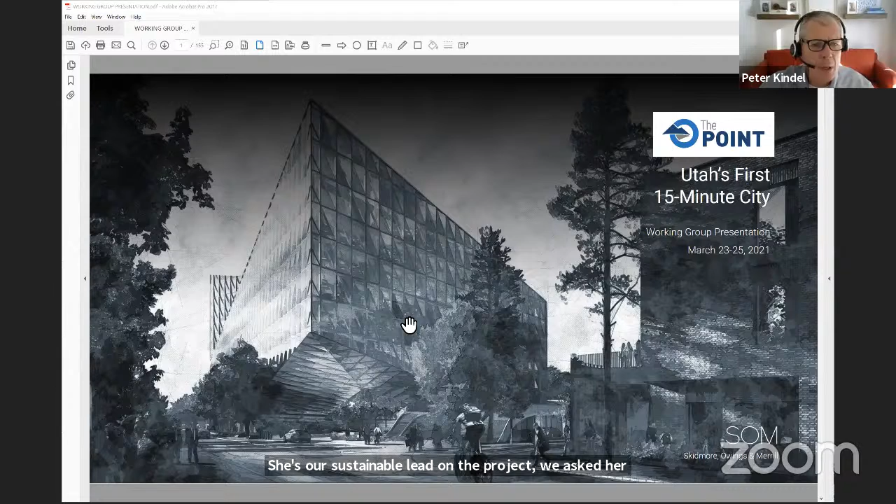Great, thank you Alan, and great to see everybody again. I also want to introduce Arthi Gowda, our sustainability lead on the project. We asked her to join today because of the subject matter. As Alan mentioned, I'll walk through a quick summary of the three schemes or three concepts.

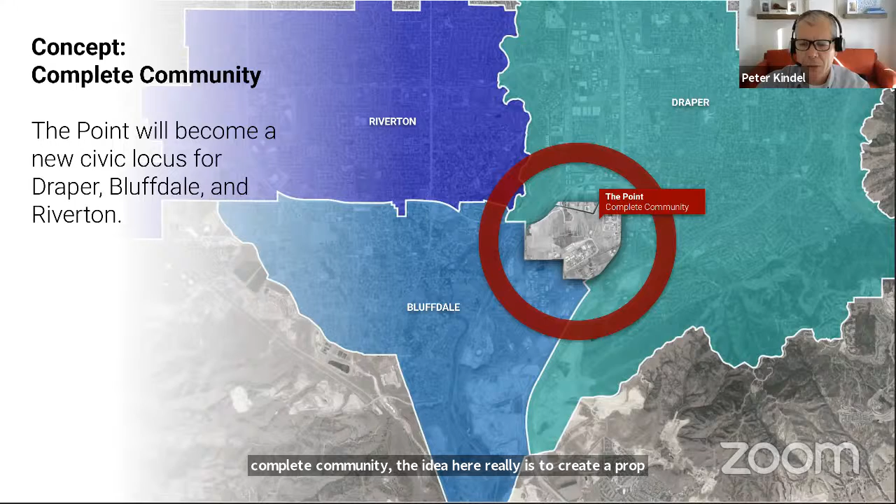Concept one is the complete community. The idea is to create a project most responsive to its immediate context, providing different land uses that complement what's around the site, and ensuring those land uses are mutually supportive. That's why we have a slightly higher proportion of residential uses in this concept, since that yields a better jobs-housing balance and reduces offsite trips.

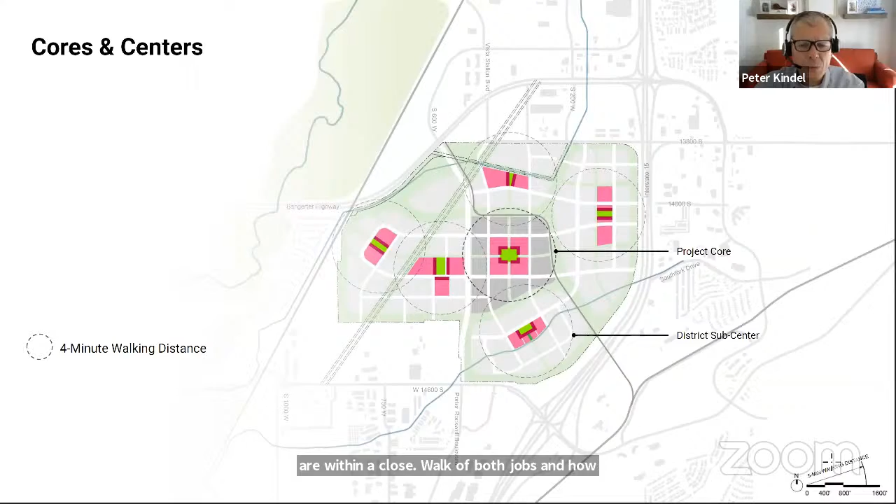We've designated land uses in each parcel. We also have cores and centers, the retail hubs of each concept, meant to provide daily services within a close walk of both jobs and housing. These might look like 2-story, perhaps 3-story buildings in some instances — a multi-use, mixed-use core and hub providing restaurants and retail services to employees and residents.

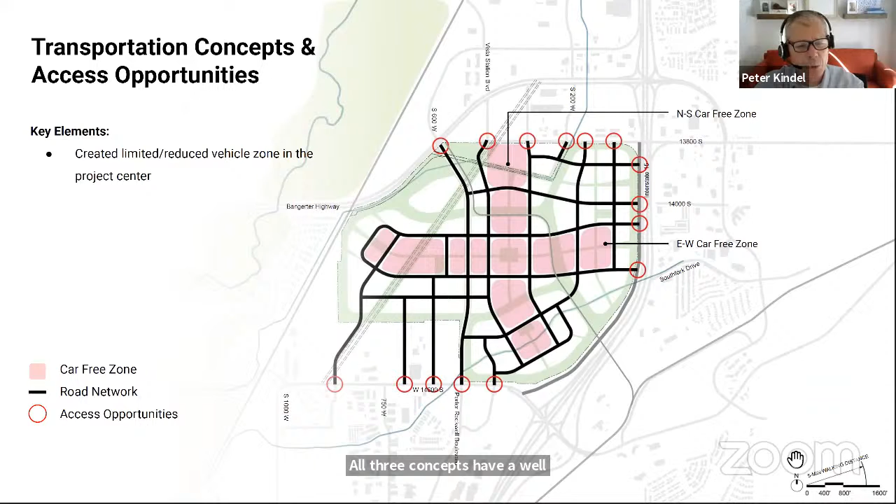Due to the population mix, which we anticipate being about 10,000 to 15,000 people on the site, we do have plans for a school. The location is still being discussed.

This is an illustration of the vertical development of the project. Generally these are 3- and 4-story buildings, but we're hoping at these central core areas there would be higher buildings and a little more density to provide focus to each neighborhood.

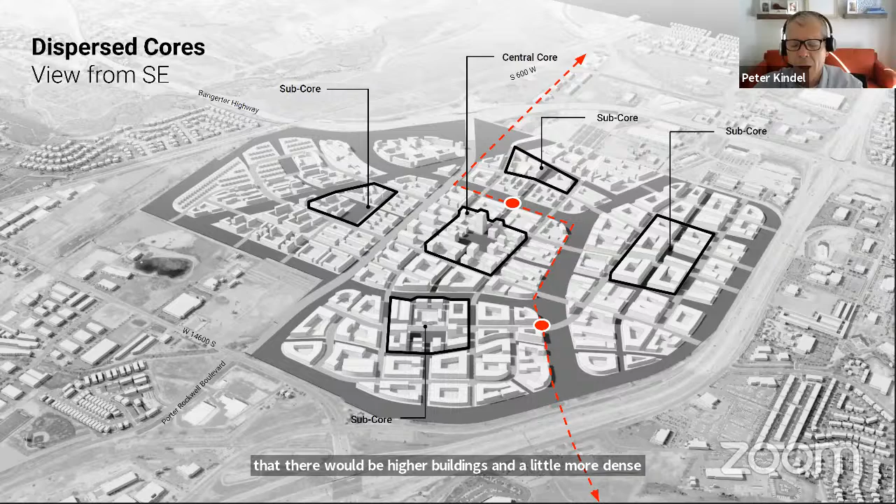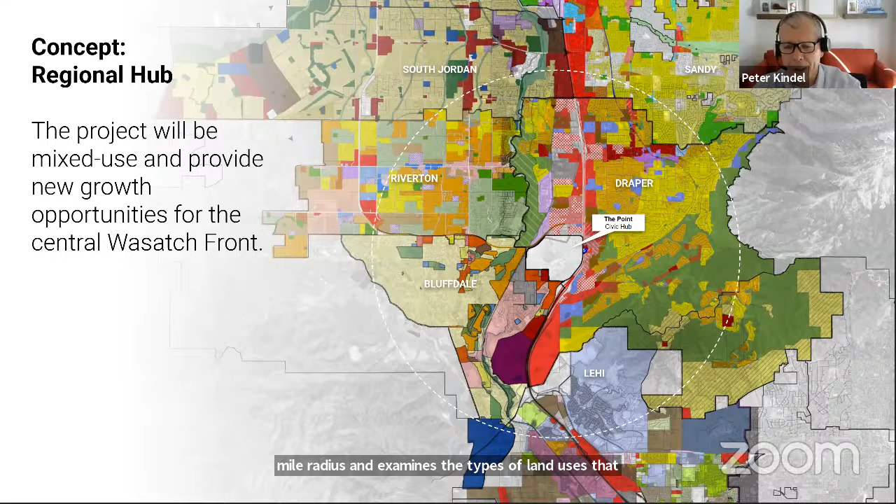The second concept is what we call the regional hub. This takes a wider look at the surrounding communities, about a 4 to 5 mile radius, and examines the types of land uses that might be appropriate within that catchment area.

We generally know the housing in that catchment area is mostly single family, so one idea is to provide additional multifamily housing. The other two important ideas for the regional hub are a retail and entertainment attraction to support surrounding communities, and a more significant open space element, a sports park. The sports park would be in the northwest, and the entertainment and retail piece, as you'll see in a minute, would be more in the center.

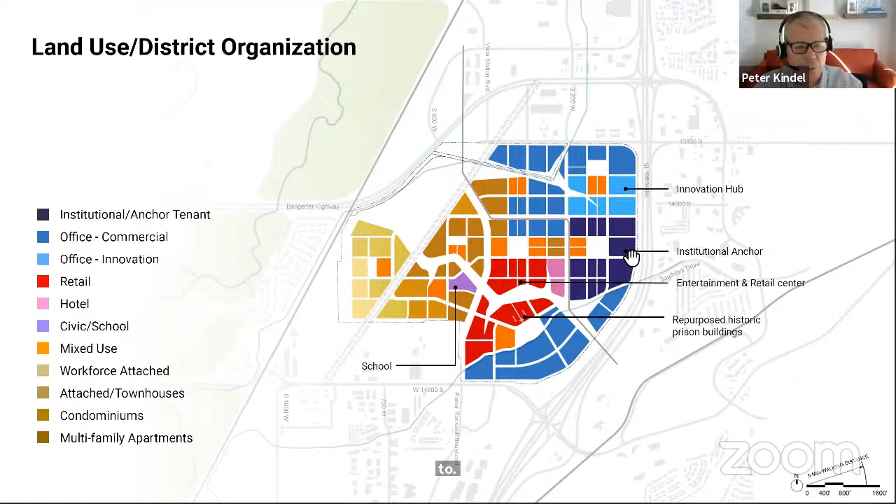We've also introduced an institutional anchor in concept 2, shown in dark blue on the right-hand side. The cores and centers would be a little more extensive, with more red and pink indicating the main project core, which might include gathering places off that park. So it's a mix of more urban public spaces and a linear park system.

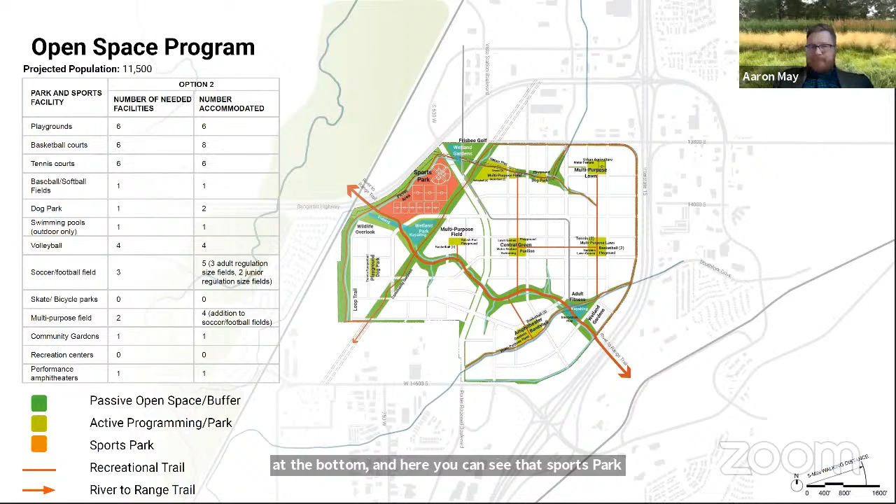We also hope that main linear park can manage and help control stormwater, acting almost as a tributary to the Jordan River, ending in a wetland park down at the bottom. Here you can see the sports park with sports fields shown. These would not be tournament-level fields; they'd probably be striped and demarcated but not lighted with extensive infrastructure around them.

The remainder of the open spaces would be programmed spaces with a slightly more focused landscape approach.

The linear park connecting through the middle of the site might look something like this, generally oriented towards bicyclists. We're hoping there could even be some grade separation between certain roads and bike trails, as you can see on the right-hand side.

Complementing that more naturalized regional open space idea would be more urban parks—smaller scale open spaces that complement the larger green space. The opportunities for car-free areas exist in the core areas of the project, which we're very excited about, complementing those larger green spaces.

This concept takes a slightly different approach to the micro-mobility strategy, introducing what we're calling an active mobility corridor—a bike and pedestrian loop linking together the whole project. Maybe it would have a light electric vehicle as a shuttle on there; we're still working through what that could be.

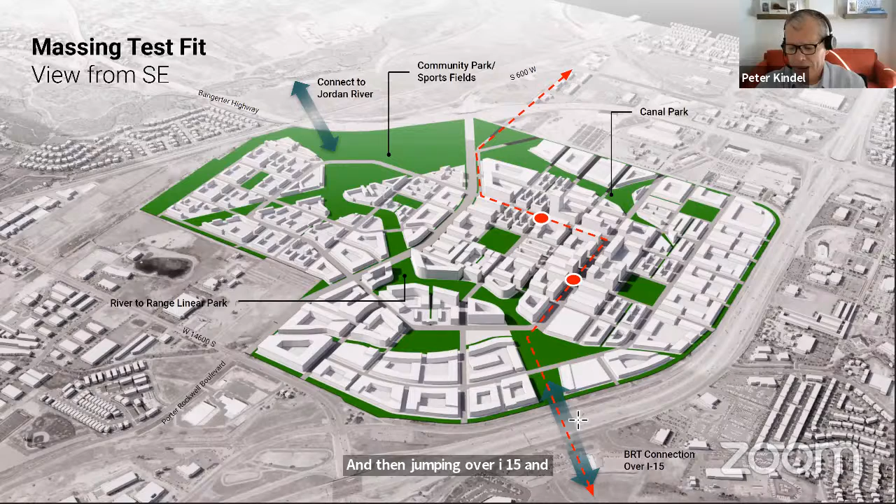Concept 3 is what we call the economic catalyst. As I mentioned, this is the most ambitious from a programming and development standpoint. We see this really as a third hub between Provo and Salt Lake, having a strong institutional or academic alliance, with the formative concept maximizing development potential.

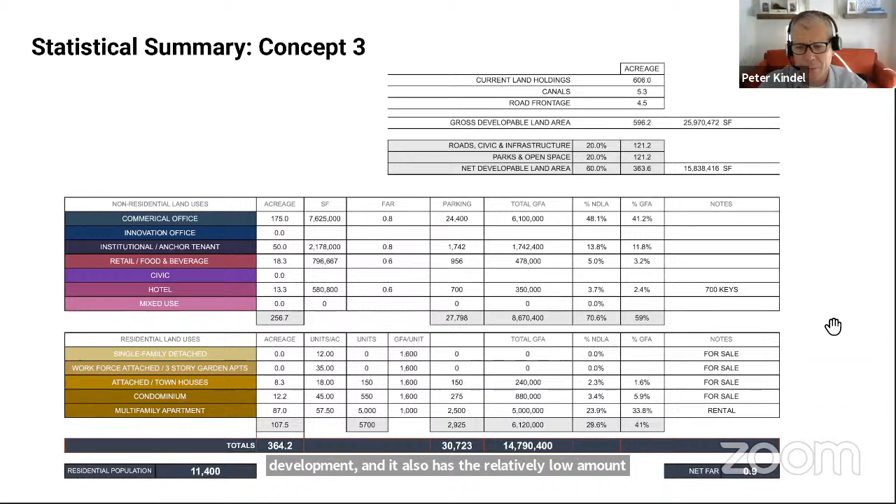Because of that, it has a higher proportion—256 acres of commercial development—and a relatively low amount of residential, about 40%. Because it's more growth oriented, it has the smallest percentage of open space, about 20%, with about 60% developable area.

It also has the most commercial and office uses, organized around a central core and a significant central park, which you can see here in the center of the drawing. It has an institutional anchor, and to the northeast, what we're calling an innovation accelerator—a second innovation-based hub more focused on R&D and product development.

The institutional buildings might look something like this—this is from Mission Bay in California, which has a significant institutional presence.

But this gives you an indication of the height and scale of probably some of the buildings in these institutional areas, and also the office elements.

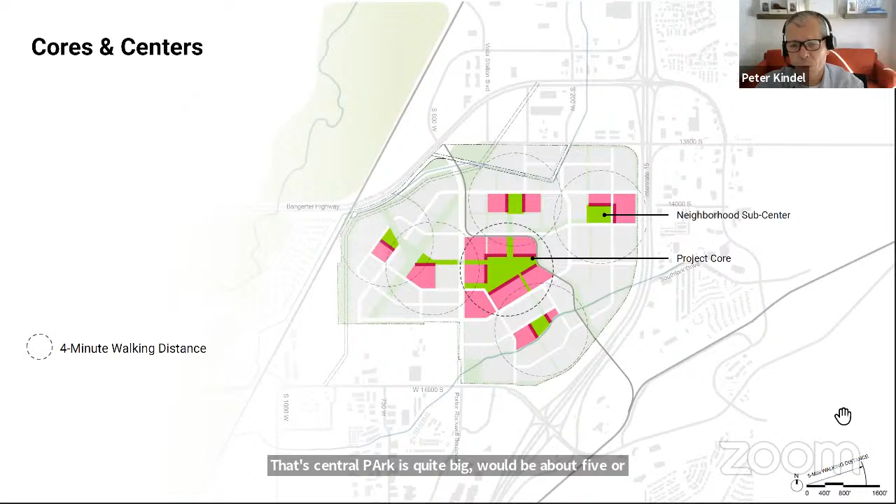The core and center in this concept really is quite distinct. You can see it there in the middle around that green Central Park. That Central Park is quite big—it would be about 5 or 6 acres in size, about 700 or 800 feet in the long dimension.

And then we see complementing that Central Park what we're calling the Hive. That would be a mixed use building that is taller—probably the tallest building in the project. It would also have multiple functions: school, incubator, social hub, lecture hall, really acting as a focal point for this economic catalyst idea.

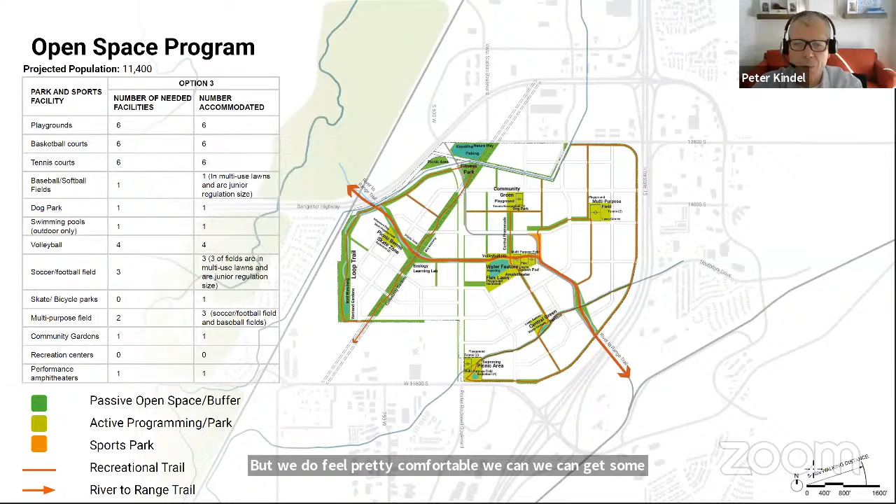Because this one has the smallest amount of open space, it does require a little more thinking in terms of how the open space is programmed. Here you can see some first thoughts on how that might be accomplished. But we do feel pretty comfortable we can get some usable recreational amenities in most of these parks—it'll just be a little more limited than some of the other concepts.

The Central Park may also have other community functions and activities lined by restaurants, as you can see here, and retail, but also just simply providing this respite from the development and also a gathering place.

Because concept 3 has the lowest amount of open space, we're a little more challenged in terms of how we can manage stormwater. So we're looking for a significant green infrastructure element to help us manage that water that falls on the site, also the snowfall, and really conserve the water.

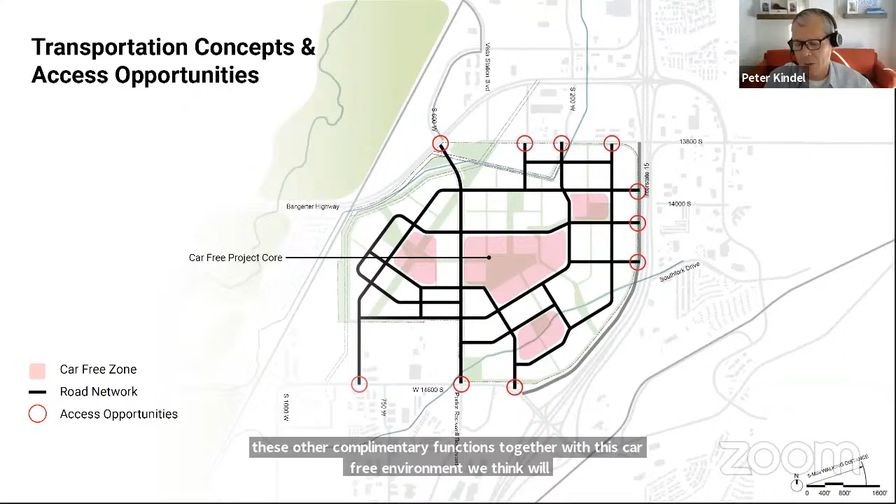The other interesting attribute of concept 3 is this quite significant car-free area in the center of the project. So the Central Park plus the Hive building and these other complementary functions, together with this car-free environment, we think will be a real signature of the project in this concept, and we're excited about that.

And that may include places like this, informal dining, outdoor dining in the summer. Really, I think an exciting environment.

This also does have the most significant institutional zone. In this case, it's predominantly oriented to the south, and the school, the K through 12 or K through 8 school, would be shown here in purple somewhere on the west side of that central boulevard.

And the institutional elements, again, may look something like this if it has more of an educational focus. This is from our project in Merced, California, the University of California, Merced, where there's libraries and research buildings and other institutional amenities.

So here you can see the three-dimensional test fit, we call it, of concept 3. You can see those taller buildings, slightly more dense development around that central park. You again see the scale of that central park—it's pretty significant. The BRT would run right through that central zone and then exit the site to the north.

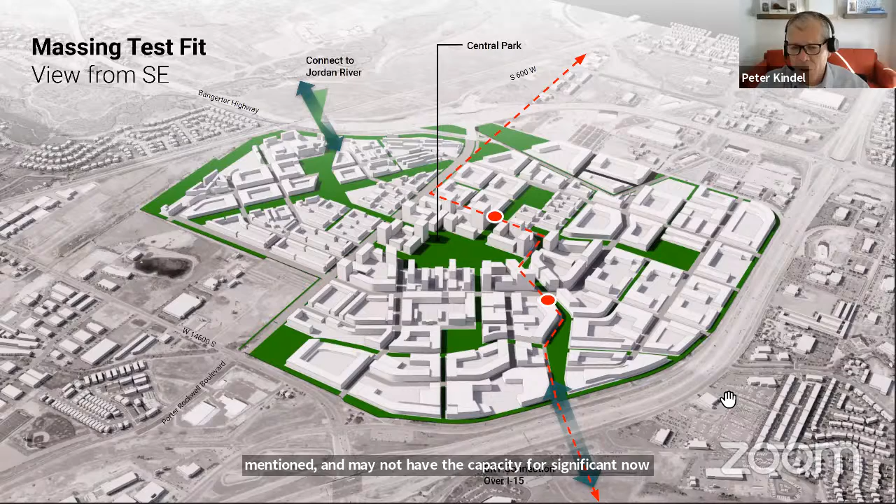And the Jordan River connection would still be there, but it's a little more constrained, as I mentioned, and may not have the capacity for significant naturalized areas or stormwater management, but it still would be there as a recreational connection. So those are the three options, and I'd be happy to take any questions you might have.

So this was kind of a review of where we were last time to make sure that we're up to speed. So before we go into showing how we've evaluated these concepts, any general questions or comments?

Ellen: I have one, and sorry I wasn't at the last session, but I'm curious why the commercial and residential are so segregated rather than having buildings that integrate them, like ground floor commercial, upper story residential.

Pete and Steve, you want to respond to that? Yeah, it's a discussion we've been having. For the next round, we will have mixed use development like that. Just for this round, we've only begun to indicate that in the drawings, but it's definitely something we want, and something we've recommended be a part of these core areas.

So even though you're just seeing red in certain areas on these plans, there actually would be additional retail in some of the neighborhoods. But I would add that where you see red, you should in your mind's eye see it as a large percentage of mixed use in those areas. So that red, think of it as what's going on the ground floor, not necessarily what's going on all the floors. It's just, it got really complicated to try and break down mixed use at this level.

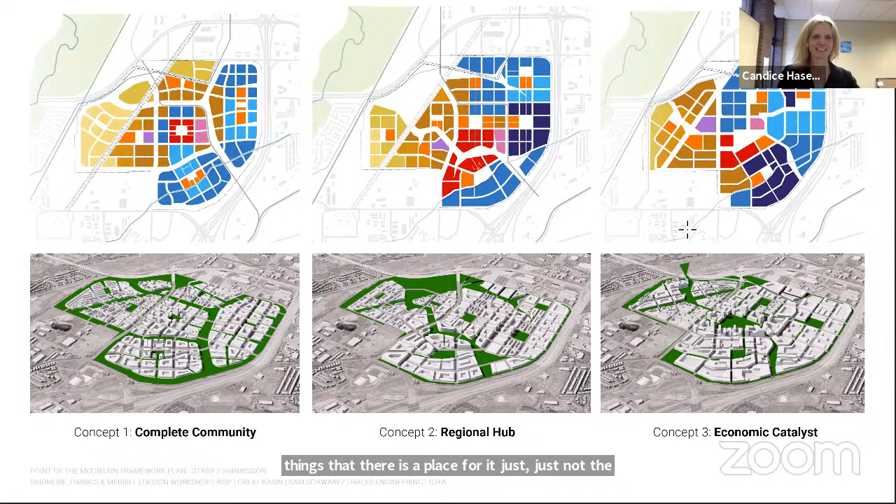I think we're on the same page there, Candice. Yeah, totally on the same page.

Yep, good, Soren. Thank you, Alan, and really appreciate a great presentation overview. I sat in on the one a couple weeks ago with the entire stakeholder group, so these look very familiar.

I had a couple of thoughts. One is building on what Candice just said, really thinking about the images and the nature of water use in an area where water is both decreasing in availability because of climate change impacts and increasing in demand because of the growth of the region. So be very conscientious about images used to portray ideas, that they really reflect the situation we're in.

I love the ideas around green infrastructure you've got worked in, particularly as we think about runoff and how those can be elements of natural landscapes as well. Would love to see some of the imagery reflect what that green infrastructure might look like as edges of maybe turfed areas and things like that, as you start to develop very project-specific imagery.

The other comments I have have to do with placement. In terms of school, we're working pretty actively with the Jordan River Commission and developing citizen science programs with elementary and secondary schools. I presume the school you're looking at here would be an elementary level institution.

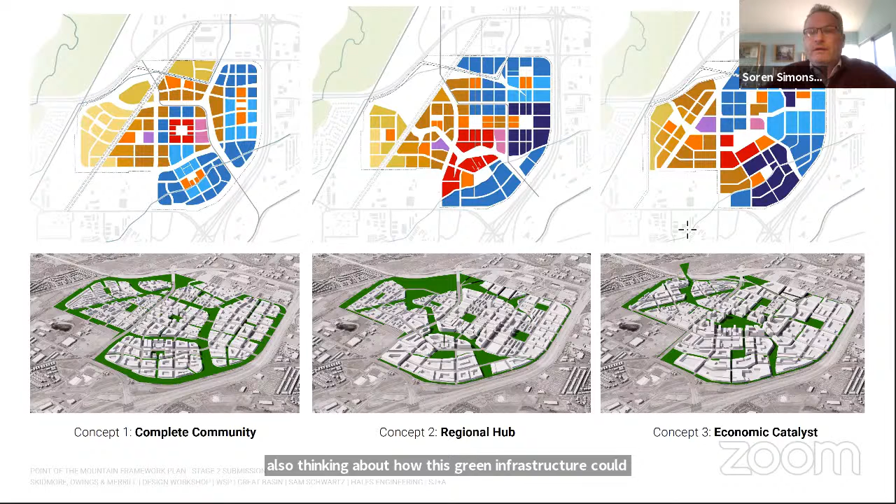Think really carefully about the placement of that school and the connectivity. I know in all of these schemes you have connections to the Galena Preserve and the Jordan River Parkway. We're hoping to really see schools located near the river take advantage of opportunities for hands-on science curriculum, which was recently adopted as an important core science standard in the state. These are important opportunities for students to be involved in bird monitoring, wildlife monitoring and habitat, understanding hydrology and how water systems work, and what better place to do it than right here where the range-to-river connections are so close. Also think about how this green infrastructure could be part of education opportunities, demonstrating things people could eventually implement in their own households.

Kind of along the lines of what Candice said, I don't know if you have this in your resource library, but look at the localscapes documentation prepared by Jordan Valley Water Conservancy District. I think that could apply to very small landscapes around buildings and buffers, but also to very large landscapes like active parks and play areas. In other words, focusing turf where it's needed, but really looking at other more natural, native and water-conserving landscapes around.

Sorry, Soren, what was the name of that organization?

It's Jordan Valley Water Conservancy District, and the document and program they've developed is called Localscapes. Really fantastic program that kind of gets at this.

A couple of other thoughts that have to do more with air quality. I see in at least the complete community the idea of buffering the freeway and Bangerter Highway, I-15 and Bangerter Highway. I don't know how familiar you are with a lot of the airshed research that's been going on over the last almost 3 decades now, that really was initiated in Utah and is happening all over the country. MIT and USC have been particularly focused on this. But the real health impacts of major freeway and rail corridors in terms of heart disease, lung disease, cancer, and things like that—buffering from these heavy transportation corridors becomes essential to well-being when people are spending large numbers of hours a day or at night in close proximity to these corridors that produce a lot of fine particulate matter.

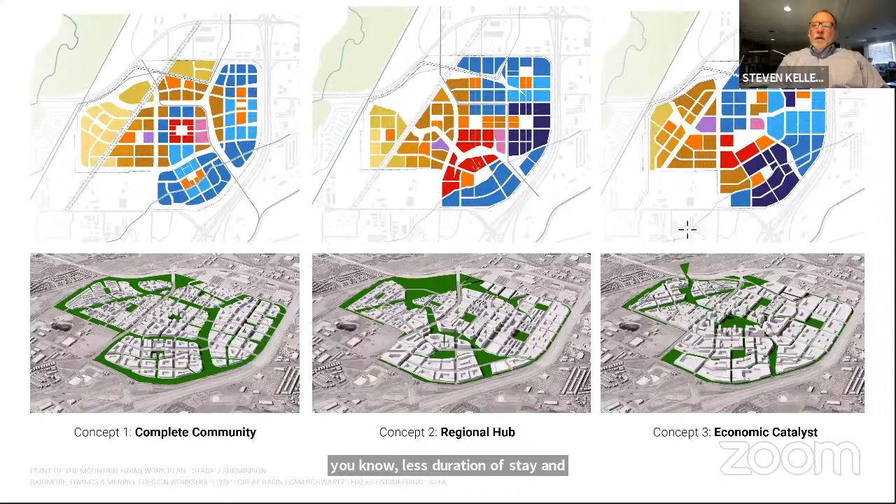The plans so far basically orient mostly non-residential and commercial uses adjacent to the interstate. Do you think it's the same issue, given the ability for less duration of stay, and also the ability for commercial buildings to process air quality mechanically? Sure, those are all factors, and it certainly could be an influence in the design of mechanical systems.

I think generally I might suggest connecting with Arden Pope at Brigham Young University. He was really doing a lot of the foundational work around this research that's now happening all over the country, and has been for a couple of decades, in terms of buffering from polluting corridors like a freeway or a heavy rail corridor. I'd definitely put him on your list of people to connect with to look at the latest research.

I don't consider myself an expert on it, but having worked around land use and public policy for 3 decades in Utah, and understanding air quality at any level is a health impact—but particularly in areas where it's such a heightened impact—I think it's worth investigating, because it does affect people's lives and livelihood, especially young people and aging individuals that are more affected by fine particulate matter. It certainly can have an economic impact in terms of land, but I think we're in a state and region that values life at least as equal to land value, and so I think that really should be a factor and a focus of this project as a demonstration of best practices.

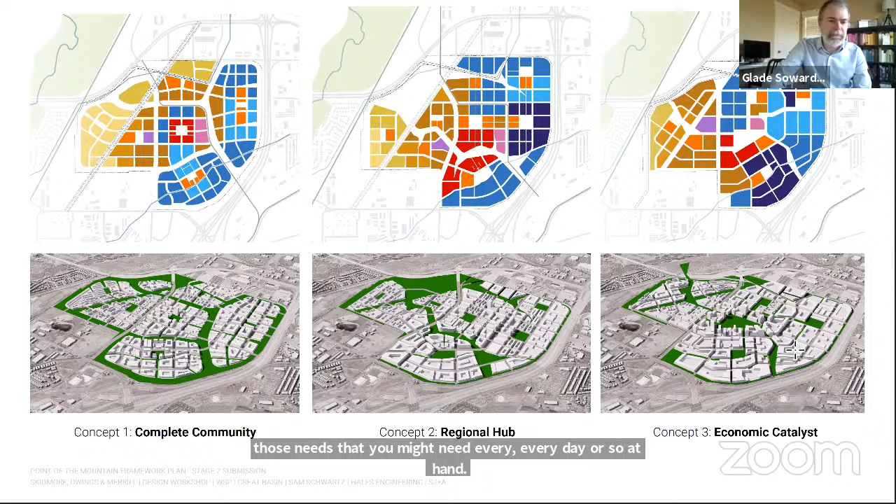Really good points, Glade, thank you. That is something we've given a lot of consideration to, and in fact you'll see some of that being evaluated in this next section. So thanks, very good points.

That's a terrific overview. At this point, we're going to dive deeper into each of these concepts and show how they perform relative to various key criteria we've identified, and then look forward to more discussion on some of those details. So Pete, turn it back to you. Great, thanks Alan.

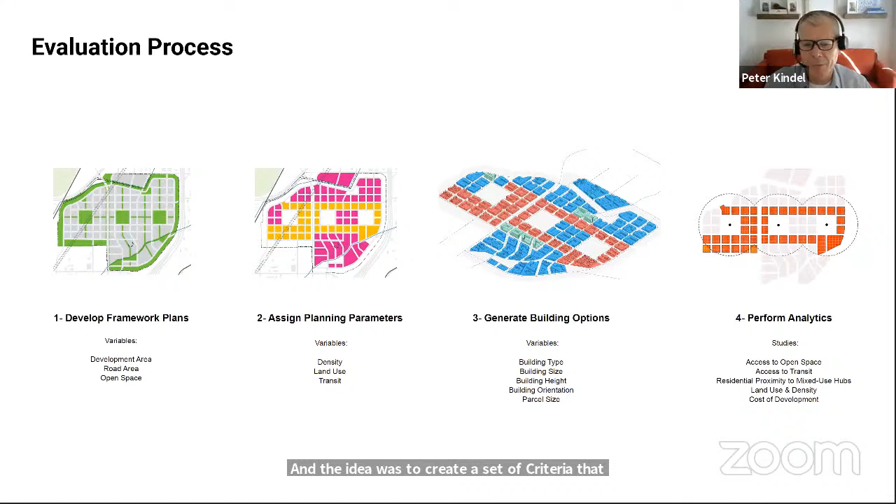As part of our stage 2 conclusions, we undertook an evaluation of the 3 options. The idea was to create a set of criteria that allowed us to objectively analyze the benefits of each concept. The basic methodology was to develop the framework plans, assign a series of planning parameters to them, and then perform analytics to varying degrees on those parameters. Again, the goal was to create an objective set of criteria to see which concept was performing better against these 25 criteria.

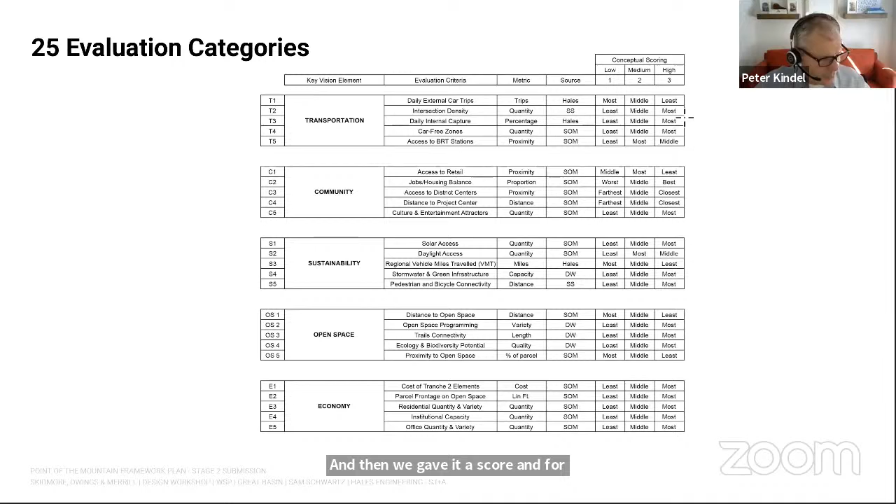Here you see the 25 criteria we developed. They're grouped into 5 categories on the left that correlate approximately with some key vision elements. We determined the specific criteria in this middle column, then identified a metric by which we would measure that criteria, and then gave it a score. For this round of work, we kept the scoring conceptually simple: we scored the best performing concept with a 3, the worst performing concept with a 1, and the middle one got a 2.

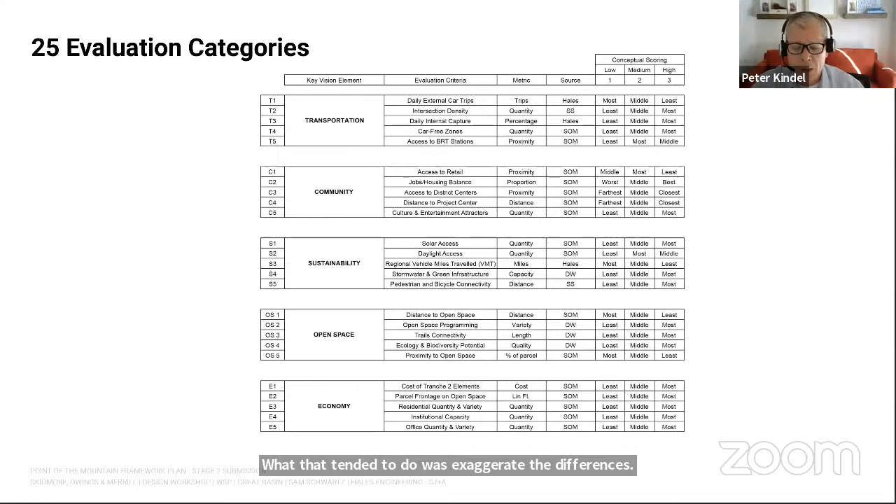What that tended to do was exaggerate the differences between the schemes, as you'll see as I go through them. However, through that exaggeration, it did give us a clearer picture of which scheme was performing better. So I'll go through these pretty quick—please feel free to stop me at any time.

Criteria 1 was daily external car trips. This is critically important in terms of air quality, and is dependent on the land use mix. You can see concept 1 performed much better than the other 2 concepts because of that land use mix—having residential here creates fewer external car trips. That's the simple reason why this one did so much better, by about 20,000 trips per day.

The second criteria is intersection density. Planners typically look at something like this because it's a measure of porosity of the plan, meaning how easily it is to move through the plan, both with a car and without a car, simply a measure of movement. In this concept, the intersection density was highest on concept 2.

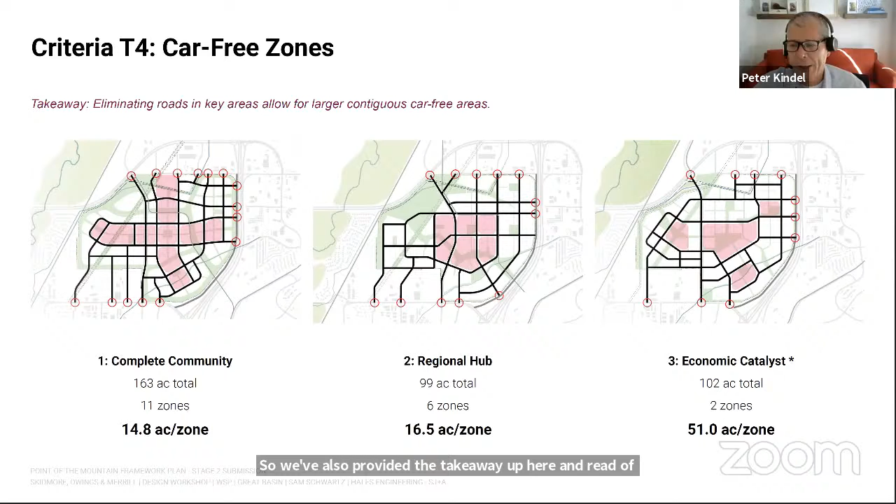These are preliminary recommendations, open to comment. Our conclusions: residential land use must remain a portion of the project program. Number 2, create the smallest reasonable block to facilitate connectivity. Number 3, adopt a regional retail mix that increases on-site capture. Number 4, access to BRT - minimize large open spaces near BRT. This sounds logical, but we want to maximize development immediately adjacent to BRT to accelerate that use. Number 5, selectively eliminate some automobile roads to create meaningful car-free zones.

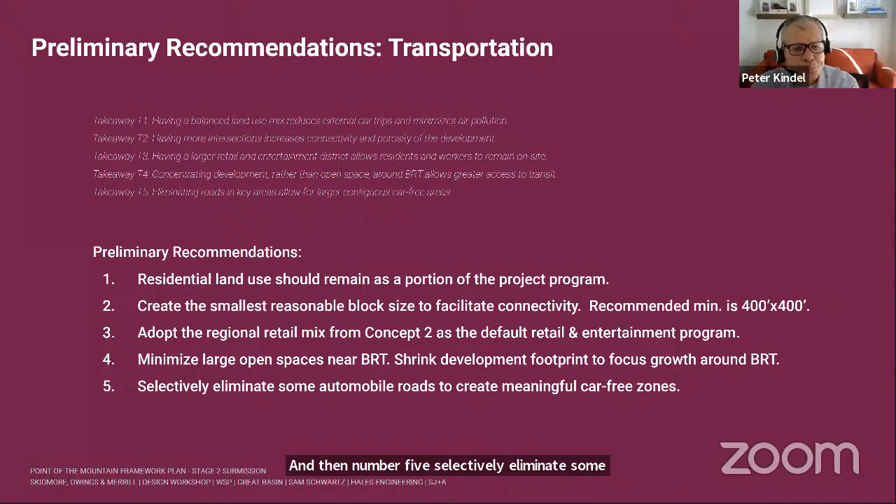The second set of criteria is the community evaluation, more around land use. The first is access to retail. Each of these black dots represent a sub-district hub or mixed-use hub - this is where vertical mixed use would occur. This simply measures, from residential or mixed-use designations shown in orange, how easy it is to get to that retail without driving. In concept 2, 100% of the people residing here or in the mixed-use parcels are within a 5-minute walk of that mixed-use core or sub-district hub.

We looked at jobs housing balance as well, criteria C2. The typical jobs housing proportion in the Wasatch area is somewhere between 1.5 and 2. In this project, because it's more commercially focused, we have a high jobs creation number, generally in the 30,000 range. When we create the most households to go with those jobs, we get a smaller number, so the jobs per household is more in balance. Concept 1 performed best on this metric because it has the highest proportion of residential. That was criteria C2.

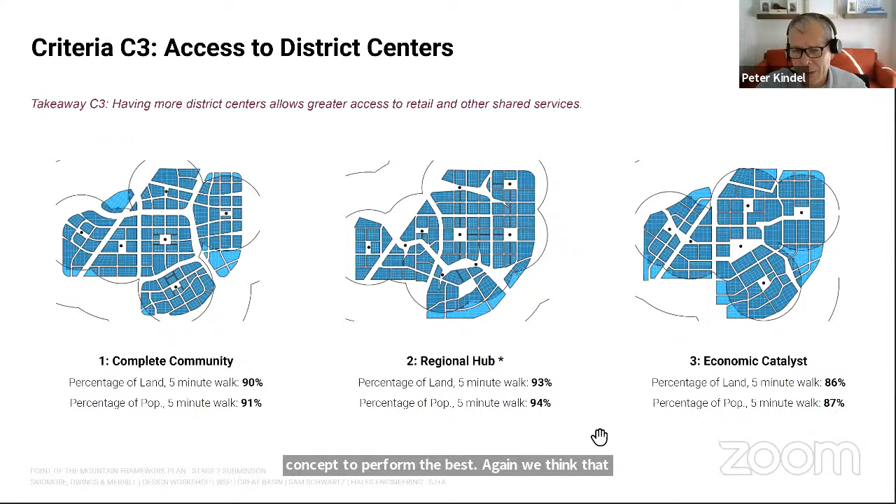The next criteria looked at access and walkability - specifically, access to a district center from the entire development area. In this criteria, concept 2 performed the best, and we think that's because the compressed development footprint accelerates and enhances the walkability of the project.

The next criteria is understanding how far everybody is from the project center. One of our original principles was to have a clear center here, a clear identity for the project. In option 3, that's incredibly clear, concept 3, with that strong central park. But project centers also exist in the other 2. In this case, concept 2, the regional hub, performed the best, with about 32% of the people within a 5-minute walk of that project center.

That's really great. Criteria C5 looks at a straight line evaluation of how much retail and hotel uses there are. The pink is a hotel land use. In this case, concept 2 performed the best. It has the largest commitment to a mixed use entertainment and hotel district.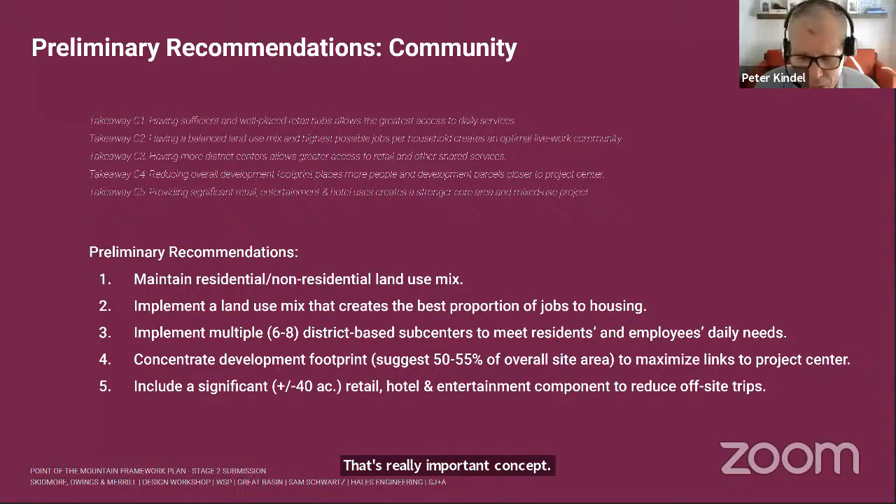That addresses the idea of meeting the needs of workers and residents on site to reduce off-site trips. So the recommendations from this set of criteria are to maintain the residential, non-residential mix, implement a land use mix that creates the best proportion of jobs to housing, and implement multiple district-based sub-centers. That's a really important concept. Concentrate the development footprint, so rather than develop the entire site, concentrate that into, say, 50 to 55% of the overall site area, and then include a significant mixed use component to reduce off-site trips.

The third set of criteria is sustainability. We looked at solar access. This is really dependent on building design, and we think it might be better optimized in stage 3, but we did run this evaluation based on the building design we created for each of the 3 options. This basically measures rooftop potential for solar. In this case, concept 2 performed the best, but they're relatively close together, so we think we can get all of them to perform at a high level.

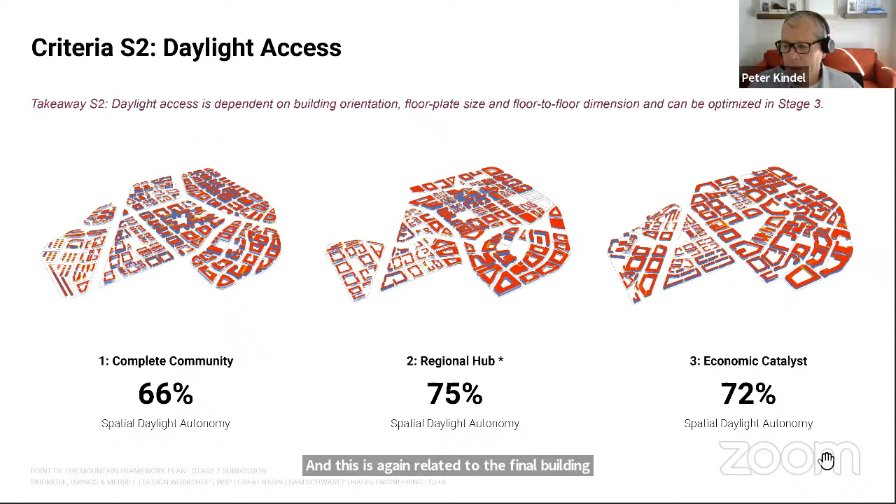The same with sustainable criteria 2, daylight penetration into buildings. We know this is an indicator of employee satisfaction and also energy savings. This is again related to the final building dimensions and layout, so we think this will be optimized in stage 3.

The third sustainable criteria is vehicle miles traveled, or VMT. The goal is to reduce VMT, and VMT is a measure of the project's impact on the surrounding road network as measured through vehicle miles traveled. In this case, concept 1 edged out the other two very closely. You can see they're almost exactly the same, with 87.9 million VMT on all 3 of them. So again, the difference is quite small.

But this is the VMT for 4 counties, not just for the project, right? Yeah, it includes VMT for all of Utah, Salt Lake, Davis, and Weber counties.

The fourth sustainability criteria was the capability of the project to manage and conserve water. Concept 1 was really designed with that intention in mind through these more linear, naturalized corridors, so that performed the best. But again, we think with a little bit of work, we can make the other 2 also perform well. Concept 3 is the least amenable to a more naturalized and daylighted water management concept, but again, it would require a little more green infrastructure work. Concept 2 kind of splits the difference and does both well.

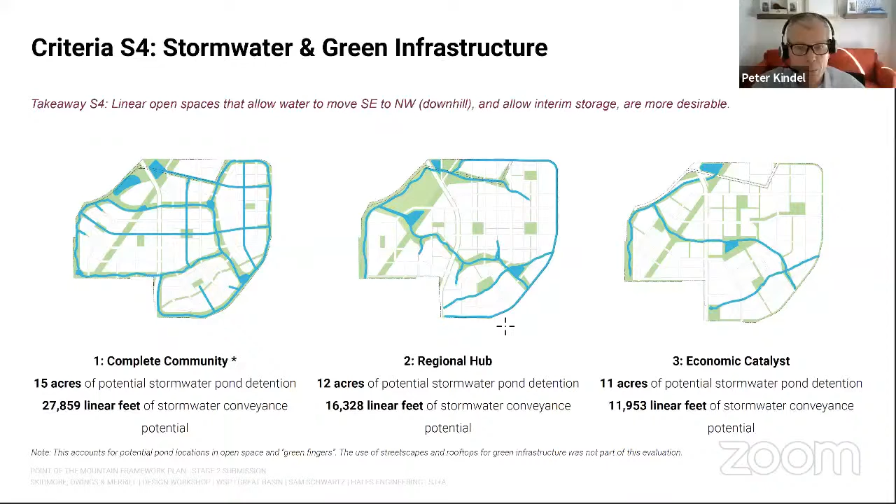The fifth sustainable criteria had to do with pedestrian and bicycle connectivity, and the methodology for this was to lay a grid over the site and measure the distance between each cell using the road or trail network. That gave us a heat map that indicated which cells were the most accessible or most connected to all the other cells. All of them did pretty well, I think because we have a nice clear road network and sidewalk network on all of them, but also we've indicated trail locations, so we see the trails and sidewalks really acting together.

Generally, they performed well, about over half the cells are within a 15-minute walk of all the other cells. So we think that's well on its way to becoming an important design characteristic.

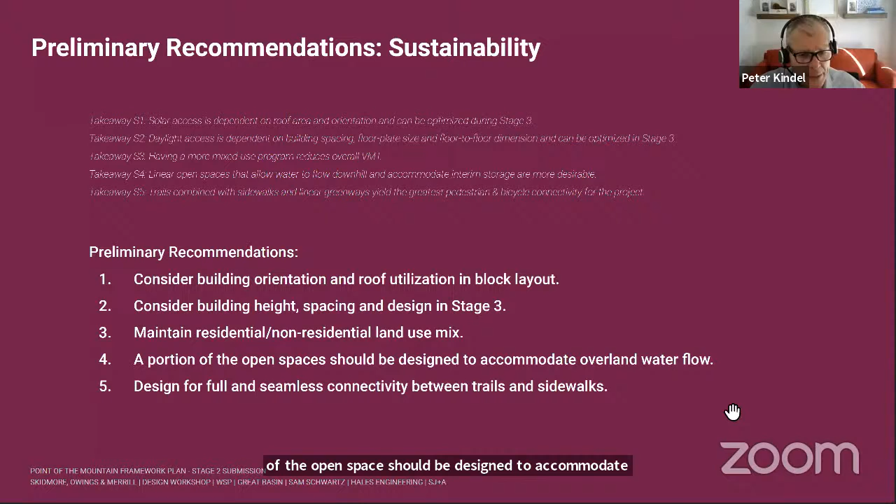So the preliminary recommendations from sustainability: consider building orientation, height, design, and layout as we refine the concept in stage 3. Again, this one comes up several times: maintain the residential and non-residential land use mix. A portion of the open space should be designed to accommodate overland or naturalized stormwater management, and design for full and seamless connectivity between trails and sidewalks.

We looked at open space in the fourth set, around both the configuration and the access to open space. This simply measured distance to open space from any point on the project. In this evaluation, concept 1 was the strongest, again because it has this more dispersed linear open space design. The average distance from anywhere in the project was 113 feet, which is quite nice.

The second criteria had to do with programmability of the spaces. This looked at the shape of the open spaces, their location, and indicates maybe more open spaces having a slightly more maintained or turf-facing character. We felt that concept 2 had not only the most area amenable to some sort of programming, but had the best configuration.

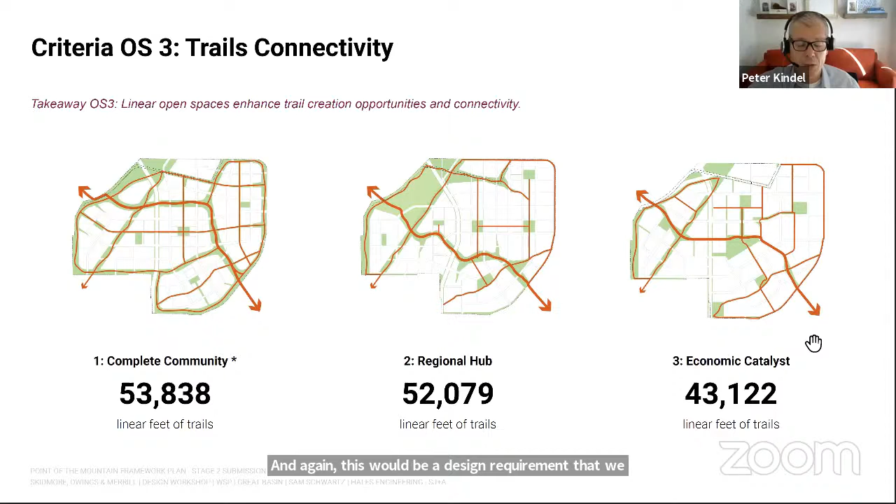This evaluation looked at ecology and biodiversity potential. This was a slightly more subjective evaluation, but our landscape team looked at each of the design options and asked what the biodiversity potential was in the various spaces within the plan. They felt concept 2 had the most potential for biodiversity creation and optimization.

The fifth criteria looked at proximity to open space, which looked at the percent of the development area within 200 feet of an open space. It's a little different than just distance; it speaks more to the general proximity of the project to open space. Concept 1 performed slightly better, we think because it has a slightly more developed or extensive green corridor network that penetrated these development zones more extensively.

The takeaway from this tranche of criteria is that we need a significant proportion of small parks and connective greenways to create open space penetration, while also creating bike and pedestrian connectivity. Complementing that with a series of district parks, 3 to 4 acres in size, that are more programmable open spaces. Finally, the third ingredient would be a larger linear system able to be naturalized and support stormwater conveyance and water conservation—that's where we commit to native landscaping and waterwise design. The fifth point is to extend and expand that network into the development zone so everybody has maximum proximity.

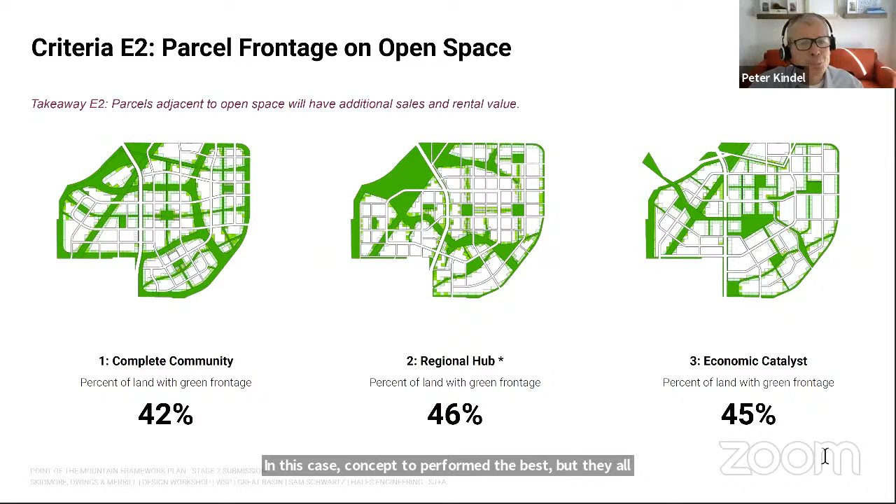The last set of criteria had to do with economics, focused on value creation. The first was parcel frontage—we know a parcel with frontage on open space has higher value and higher economic return. Concept 2 performed best here, but they all do pretty well, and again this is something that can be optimized in stage 3.

This criteria looked simply at the quantity of residential proposed, relating to providing workforce housing and new types of housing currently missing from the market. Concept 1 really excelled in this evaluation, with a significantly higher proportion of residential opportunities.

Criteria 4 was institutional capacity. Again a straightforward measure, but it also touches on something we learned in our reference project work looking at other innovation districts—that institutional presence in an innovation district is extremely important for their success. Concept 3 performed best in this criteria.

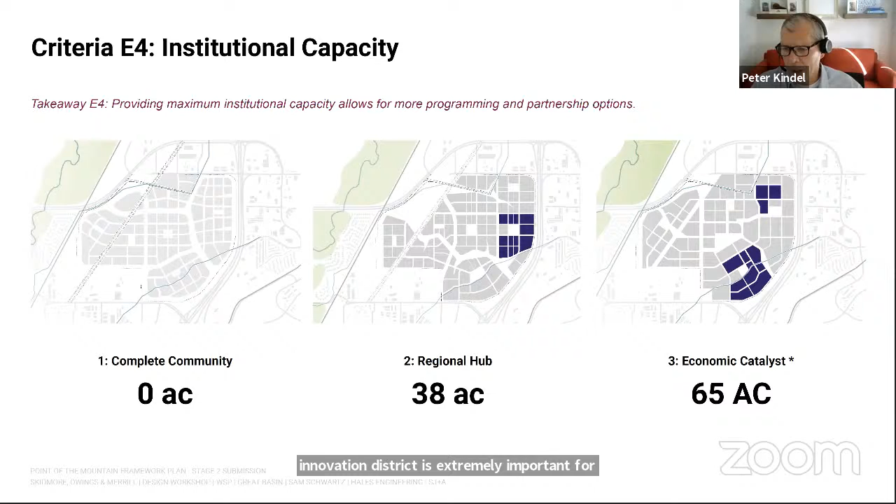The final one was office quantity and variety, the opposite end of the residential analytic. Concept 3 performed best here—it has the most office space and therefore the most potential job creation and economic potential.

So that was a quick tour through our 25 criteria. Here are the recommendations for economy: this open space idea, where people have maximum connection to open space, keeps coming out as an important goal. Commit to a variety of housing types and parcel sizes to create choice in the market, create an institutional presence, and include substantial office development to maximize economic development.

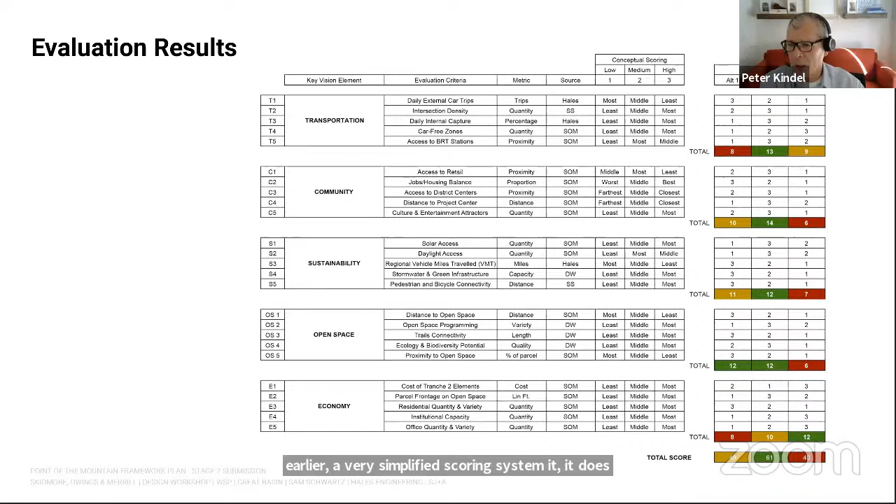We were able to enter in the scores using a very simplified scoring system. It does not weight anything in any way, so every criteria has equal weight, which we can discuss. We know certain things might be more important than others, but given that equal weighting, we found that concept 2, shown in green, performs best in the transportation, community, and sustainability tranches of criteria. Concept 1 and 2 were tied in the open space evaluation, and concept 3, no real surprise there, had the highest score for the economic criteria, since it was designed to maximize that element.

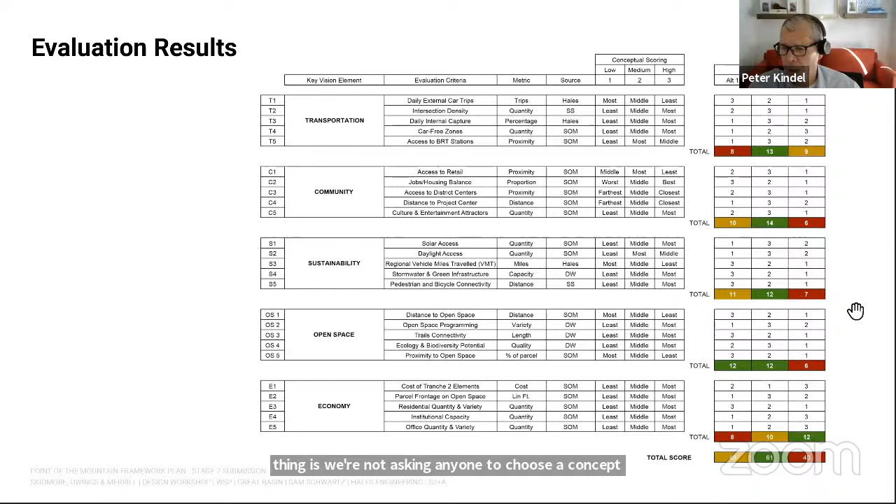So that was our evaluation exercise. We learned that concept 2 actually scored the highest in a pretty clear way. Concept 1 was second, and concept 3 had the lowest score. Now, as I said, many of the criteria results were very, very close, and this scoring methodology sort of exaggerates the differences between the metrics, so please take that into account. The second thing is we're not asking anyone to choose a concept today. The purpose of this was really to see how the best schemes did against different ideas, and then combine the best ideas together.

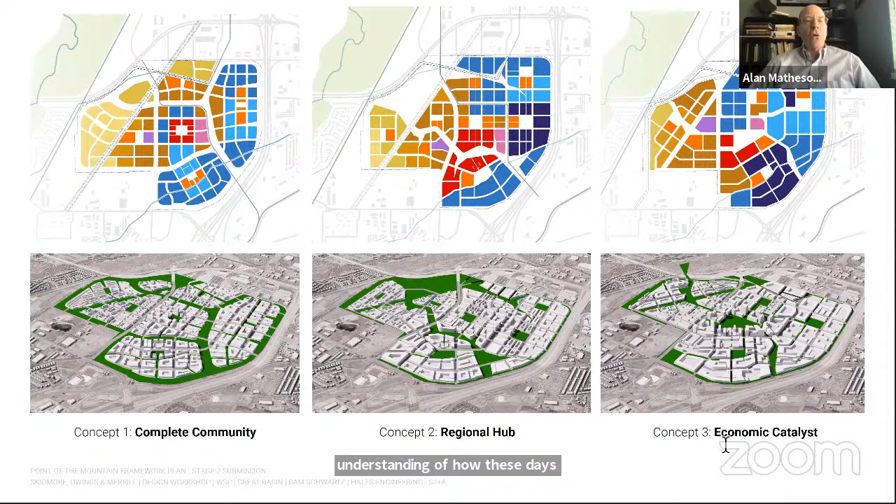That was great, and I think it's really helpful to get that more fine-grained understanding of how these different concepts perform. As you said, this isn't just a numbers exercise because we didn't weight the relative value of different criteria, and the scoring can exaggerate the differences. But it gives us a story that's a little more detailed than just what looks good. We want to emphasize something we've mentioned several times: we're not looking to say we're picking 1, 2, or 3. The reality is we're trying to identify the best elements of any of these concepts and move them forward into a preferred alternative for the site.

But in doing that, a starting place might be asking: is one of these alternatives or concepts a better urban form to be the foundation on which we build, kind of the Christmas tree on which we hang the other ornaments. Maybe just quickly as an initial exercise, I'll bring Steve in. Steve, can you talk through the urban form elements of these three, and let's see if anybody has preferences on which concept is the best base for us to build on.

Yeah, and just to reiterate, this is a bit of a thought exercise, but you have to mentally disassociate a lot of the scoring you just heard about from the individual schemes, because the scoring to a certain degree is based on the program, and the program elements, land use program elements, can be moved between the different schemes, which affects the scoring. Although on the other hand, a lot of the scoring is based on urban form, so I don't want to say it's not relevant. It is, but one of the things that's important is to find an armature on which to hang the Christmas ornaments that we're testing with these different schemes.

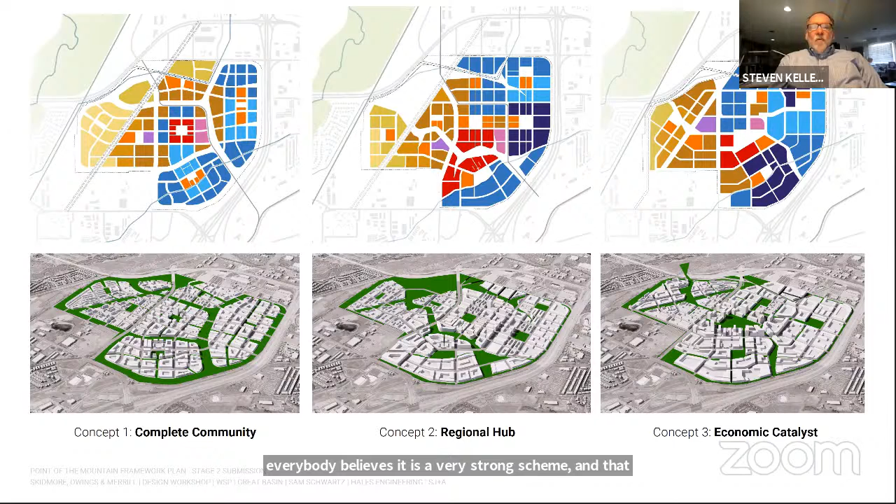The first scheme is the original scheme that SOM came up with in their design competition to win the contract, and I think everybody believes it is a very strong scheme, in that it creates a series of individual districts that are very clear and well demarked, separated by this linear open space system. That system provides a lot of trail opportunity and access to open space by an edge condition to the different districts. Another aspect is what we call a land delivery system—how we're actually developing this site. The strategy is to create districts that lean into certain land use mixes: some more residential, some more office and innovation, some more mixed use. The idea is to find master developers with expertise in those particular arenas, and assign individual master developers to individual districts. So this scheme is the cleanest and clearest in terms of subdividing the site into districts that could go to individual master developers, which isn't the most important thing, but it is an additive measure.

The regional hub scheme is one of the trends.

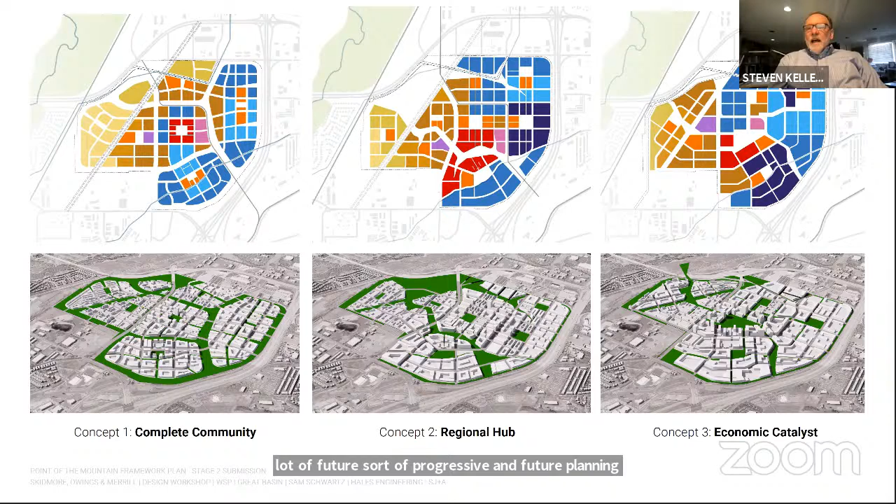If you look at a lot of future progressive planning exercises, like Atlanta 2050, Los Angeles 2050, London, they all have one thing in common: a desire to reintroduce green infrastructure—a continuous, connected open space system back into the urban fabric of our cities. For the last 50 years, we've done just the opposite. We've pushed all the green out to the edges and paved everything in the middle. The idea is to reconnect to natural systems, the rivers and regional open space areas, and have a connective tissue of open space back in.

Alternative 2 does that very elegantly. It takes the Jordan River and connects to it meaningfully with a major open space, then links in through the site with something that reflects almost a natural drainage and biofiltration system back to the Jordan River, as well as trails and recreation. It then creates a hub, the red areas, the downtown, around a portion of that system, which could create a very distinctive downtown CBD feel organized around a piece of that riverine open space linkage.

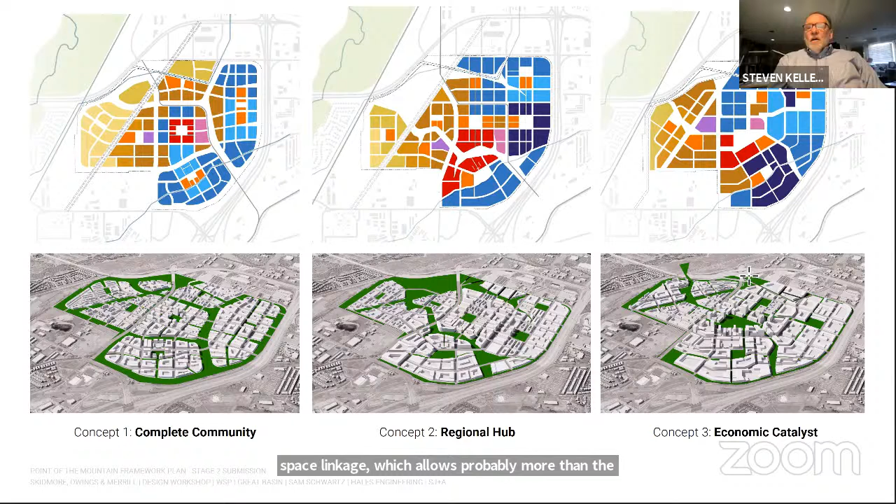All the schemes are broken into districts, but in the third scheme, the district cores are linked in with an open space, a car-free open space linkage, which allows—probably more than the other schemes—the opportunity to create a central car-free, pedestrian-oriented zone that links all the districts meaningfully into the central park area. So in a way, it's probably got one of the highest levels of synergy of linking these peripheral areas into the core.

But it lacks some of the other attributes that the other schemes have. So they're all, we think, very interesting and strong schemes, but as noted, they all have some slightly different attributes.

Thanks, Steve. So we need to stop talking and listen a little bit more. But before we move on and get more detailed input, what are your thoughts given those three concepts? Is there one that we ought to use or rely on a little bit more as the baseline for including the different uses we'd like to see? Or does anybody have a preference or thoughts on that?

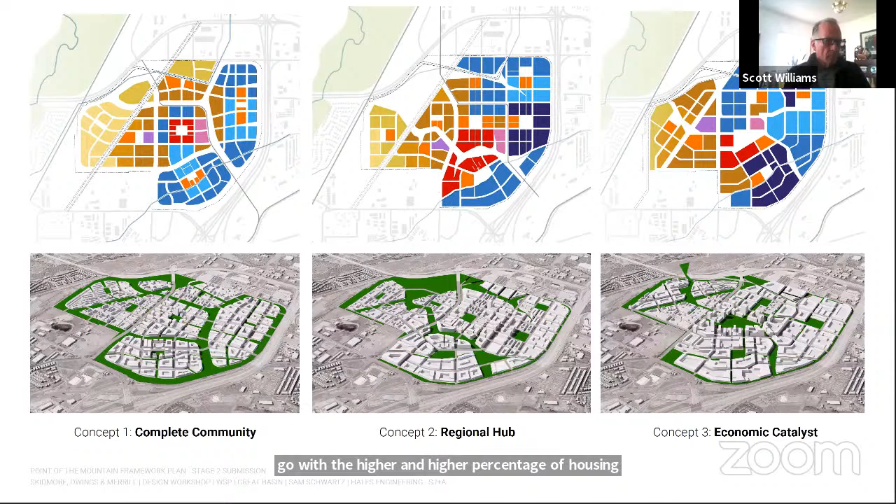Well, Alan, given that the conversation has been focused so much on the housing shortage in the Wasatch Front, I guess I wonder if that's a pressure to go with a higher percentage of housing than commercial. No, I appreciate it, Scott, and that's a big issue certainly that a lot are looking at.

I might suggest that on any of these baseline concepts, we could put in more residential. So talking a little less about the uses that would go on them, because they can be mixed and matched, but more about that underlying urban form, the skeleton that would put the various uses on. But you make a really good point—that's on the minds of many of us in this region. Thank you.

Okay, not hearing more. If you have other thoughts as we go, let us know. But let's go back more into that other discussion—as we move toward a preferred alternative for this site, what are elements that you see that ought to be moved forward, that you'd like to see in the preferred alternative out of all the things we've discussed?

And Scott, certainly your comment there is really relevant—being able to provide some of the demand for residential housing in this region is something we ought to be considering. So thanks. What other elements did you see that you like, that you don't like? What ought to move forward?

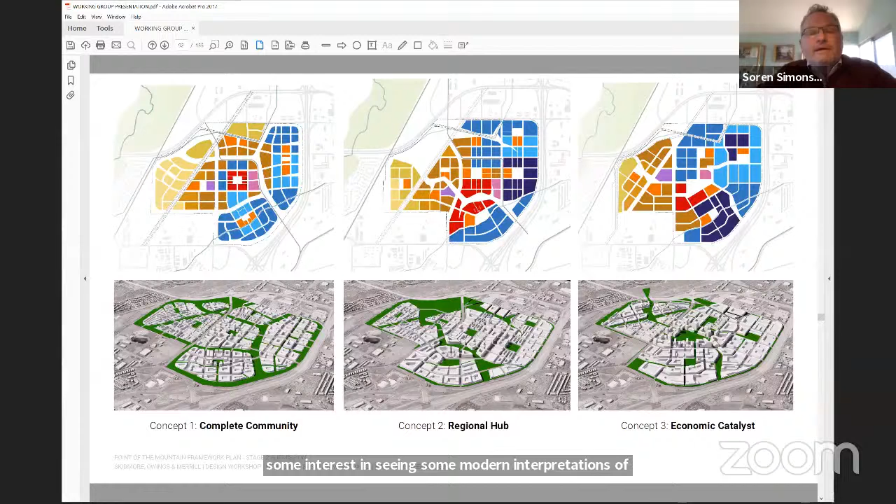Right, great. Yeah, this is a stakeholder - predominantly Latter-day Saint community, so there might be some interest in seeing some modern interpretations of that concept as well. So anyway, those are a few thoughts that occur to me, just kind of gravitating more towards concept two, maybe bringing in elements of the others as well.

Thanks, Soren. Yeah, good thoughts. Appreciate that. Other thoughts?

Alan, this is John. Hi, John. How you doing? Fantastic, good. Sorry that I missed the previous meeting.

I guess one thing that I heard in concept 2, the regional hub, was sort of a central - I think the term tributary was used - surface water conveyance that would handle stormwater. I think there's probably details on that I'm missing, and probably aren't even fleshed out yet. But I like the idea of open water. It's certainly a place where you can have educational information and places for people to be. What I don't really understand is how you get the water there.

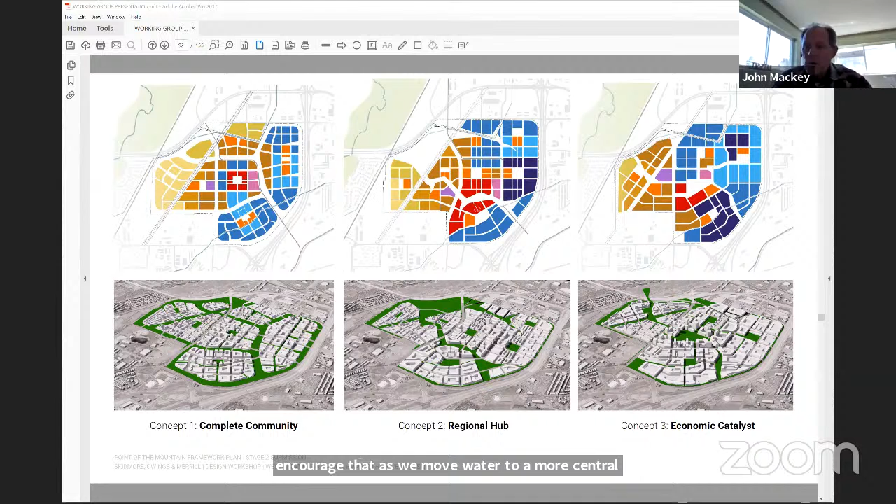There's pluses and minuses. I mean, we've talked a little bit about low impact development for managing stormwater. In one sense, you'd like to handle it as locally as you can, as dispersed away as you can, so that you don't have large runoffs to streams. But if you can move your stormwater to a central conveyance that can be a feature and not just a ditch that carries heavy runoff - so I guess maybe there's more to this and the other alternatives as well, similar ideas for managing stormwater. But I'd like to encourage that as we move water to a more central feature, that it is also being handled in a low impact way.

So that when it reaches the Jordan, it is of good quality. I think there was also mentioned in the discussion of that alternative a wetland system at the end of that stream or tributary - another good opportunity for education on water quality as well as for native species and that sort of thing. So I'm intrigued by those parts of the regional hub alternative.

Yeah, thanks, John. John and his team have overseen the development of some low impact development documents that provide best practices shared with communities, so I think there really is something there, and we've got a good head start on that, John, thanks to the good work of you and your team.

Well, and we're optimistic that you are going to push that this development will help advance some of those ideas, both for others to see as well as to maybe even find better ways for doing things. Great, thank you for those comments - those are great.

Anything else, based on what you've seen so far on these different concepts, the rankings, the evaluation?

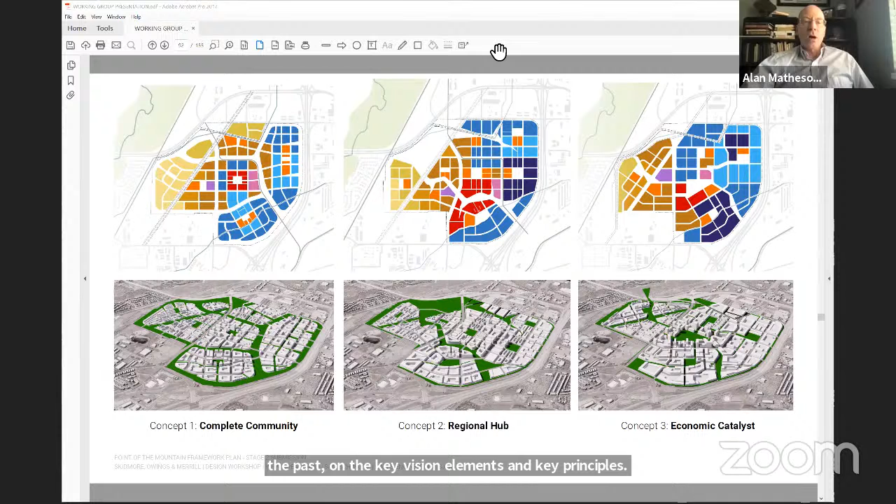Okay, I think given the fact we've got little time left and want to be respectful of your time, but also milk every great idea you have out of you before we wrap up, want to turn to the last piece, and that is kind of refining work that's been done in the past on the key vision elements and key principles. I don't think we need to go through all of them, but Peter, I'd suggest maybe we start with the sustainability piece if we can, and see if there are additional ideas that this group wants us to be considering as we move forward.

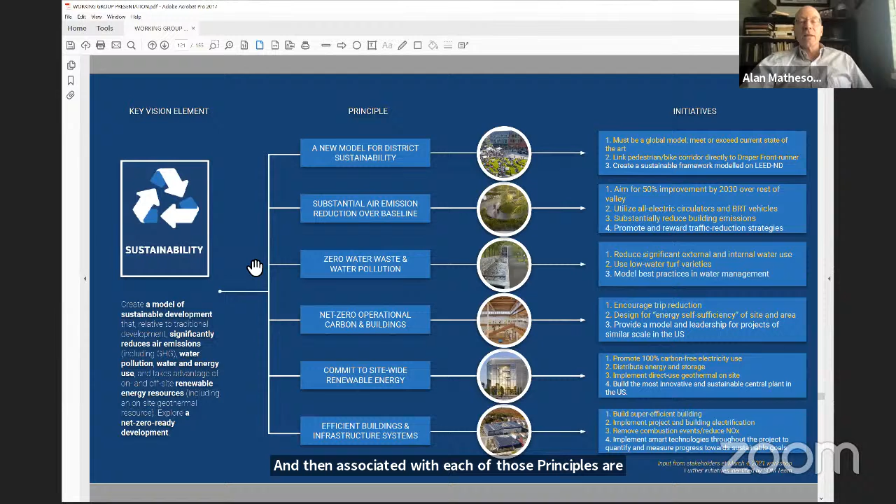And we've captured some of those during this conversation already. Then if we have time, we'll go to transportation as well, which is closely related to environment and air quality. You remember this slide, we start with the key vision element, extracted some principles we thought were important. Associated with each of those principles are some initiatives you've suggested in the past. You'll see on the right, those initiatives in yellow are ones suggested during our last meeting. We wanted to give you one more chance as experts in this area to see if we've captured the important ideas, and if anything needs to be added as we start getting into more detailed planning in stages 3 and 4. Peter, I'm sorry, I kind of took some of your introduction there, but anything you would add?

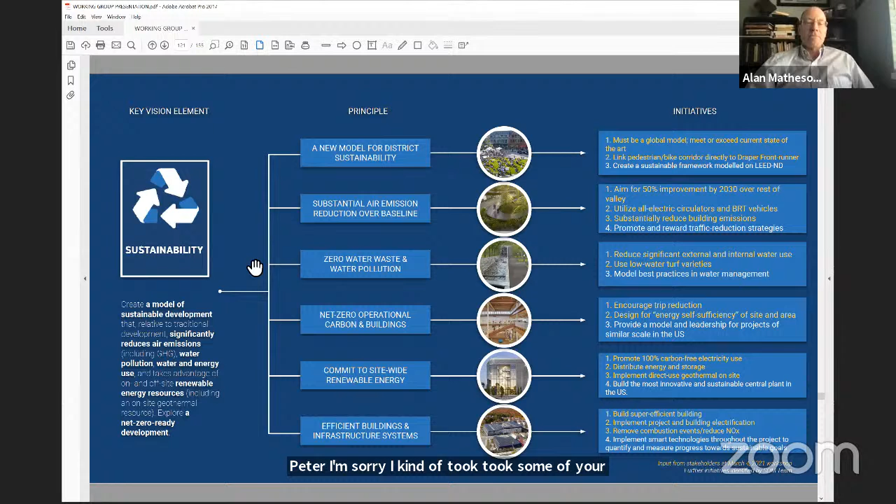Okay, well, let's just give you a minute to look over the principles, the initiatives, think about whether you'd want to reword those, refine them, add to them, etc. Sorry, Alan, I was on mute there for a minute.

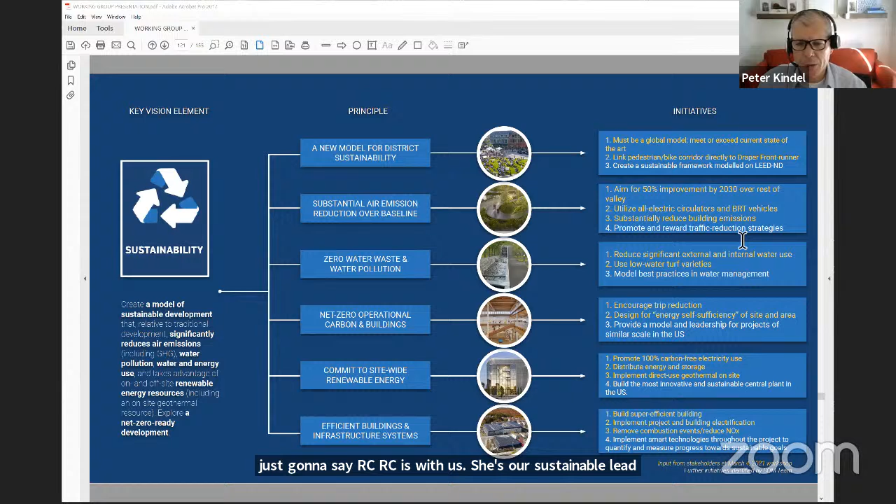I was just also going to say, Arthi's with us. She's our sustainable lead on the project, and she's available to answer any questions, or if we need to dip into the sustainable chapter and look at that quick. We are advancing the sustainable chapter around 5 key elements: waste, water, carbon, ecology, and open space. And transportation too, right? Oh, transportation. Sorry, yeah, right.

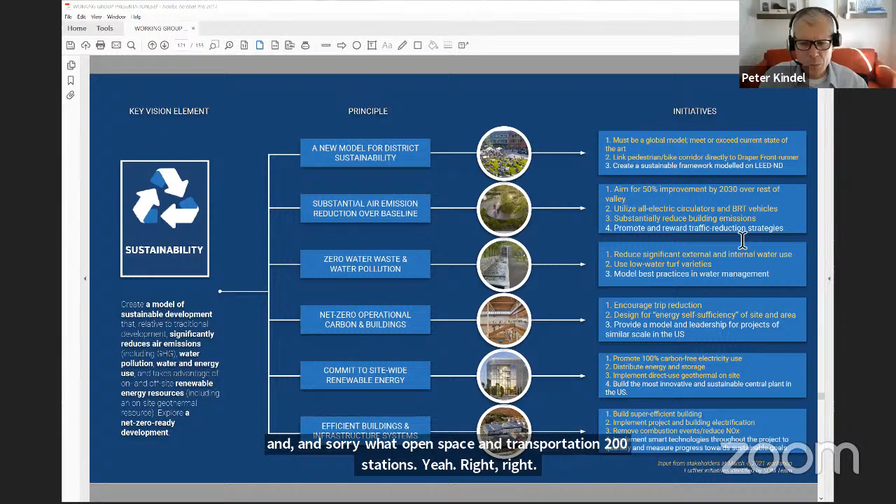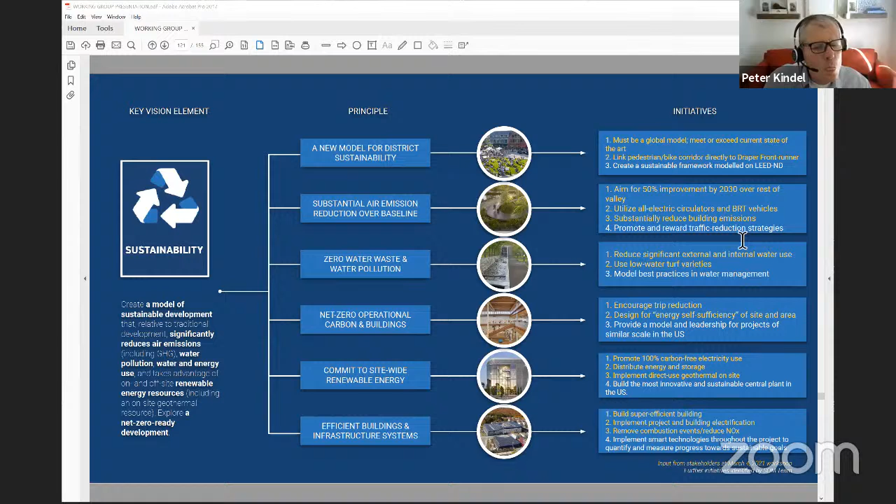So in addition to what you're seeing on the screen here, there's a parallel and complementary idea around a custom sustainability framework for the project. Arthi's been really helpful, has a lot of good experience with matters relating to sustainability, and we're happy to go through that framework with you so you can see how a number of your ideas have been incorporated into the broader thinking on sustainability.

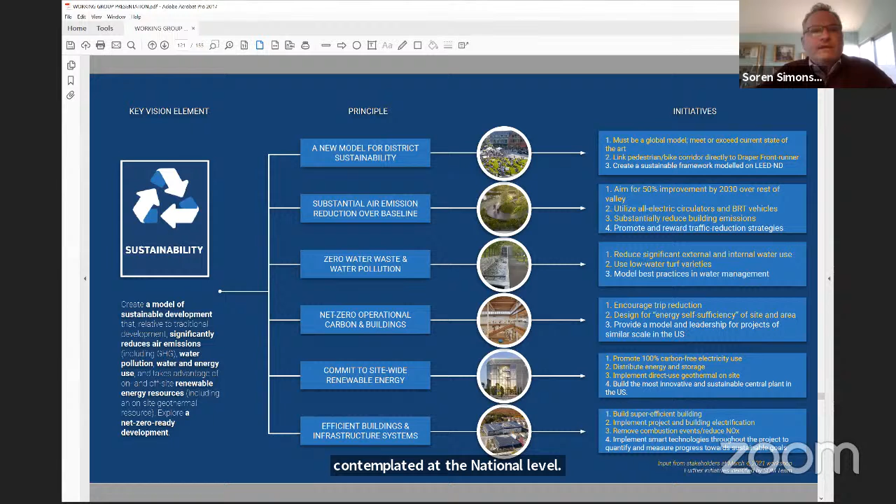So if you've got nothing more on this slide, we can take a little bit of time and walk through that framework. Let me just point real quick, I shared a resource in the chat. For about the last year, I've been working with an organization called the Coalition for Clean Energy and Healthy Communities, which is focused around the infrastructure legislation being contemplated at the national level. There are 6 principles that have been the focus of this coalition. I put the website link there.

I think these are already really well woven into what you've got on the page here. It might be worth a look at this if you're not familiar with the work of this coalition, which has about 40 organizations that are leading environmental, wildlife, and social justice organizations in the US that have brought together the crux of those 3 elements into city planning and infrastructure development. I'd recommend that as a resource to further filter and add to some of the ideas in here, but this looks like a really great list. I love the additions that SOM's added as well. Well, those were additions that came from the working groups. So congratulate yourself, good stuff.

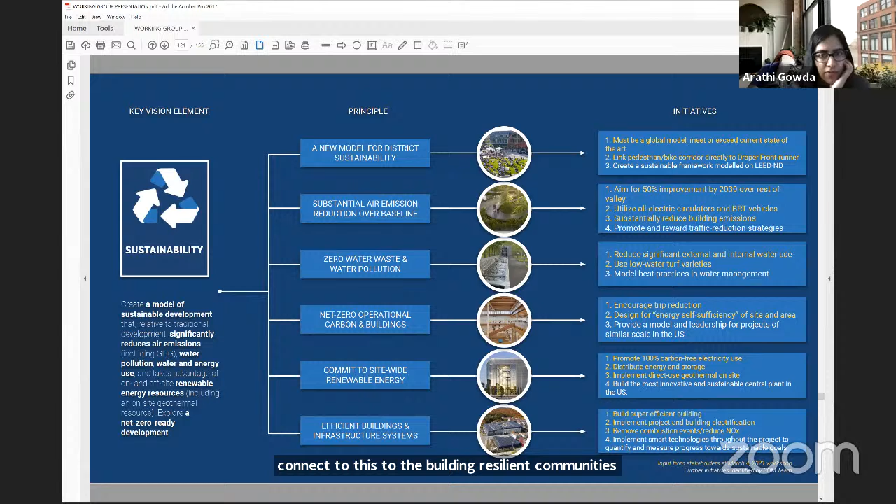Thank you, Soren. Just quickly, opening the organization you connected us to, Building Resilient Communities, I think we have thoughts, and Peter's expressed some of those, but some topics like frontline communities, Indigenous and communities of color, we haven't hit as hard. I think it would be good to connect with them and see how we could bring some of that to the forefront. Really appreciate you sharing this.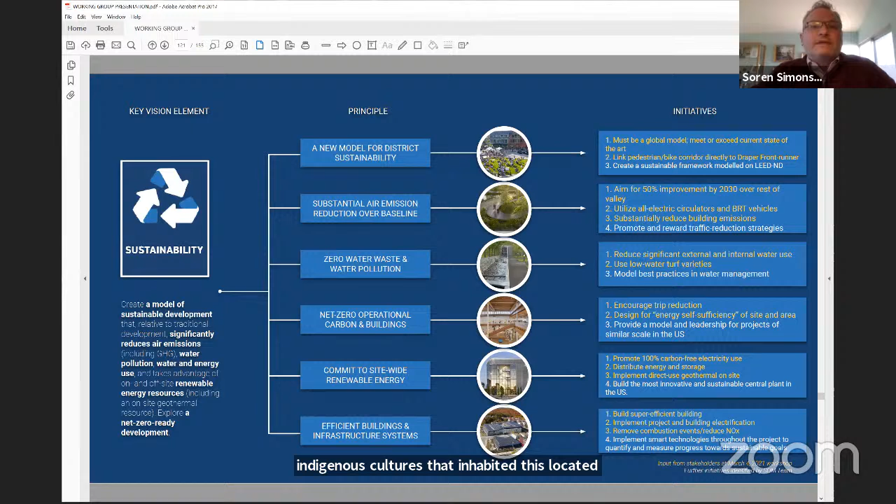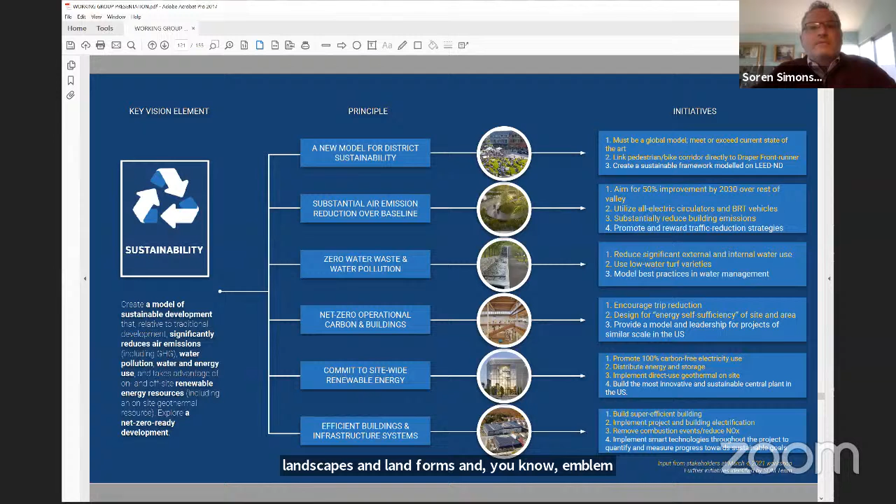I don't know if you're familiar with it, but not far from this site is a monument or plaza that represents the 7 indigenous cultures that inhabited this location of the Salt Lake Valley over thousands of years of human history. It would be really fascinating to weave elements of indigenous acknowledgement into some of the themes here. We're seeing that happening a lot more throughout Utah because we have such a rich indigenous history. Usually they're expressed verbally, but I think weaving ideas of indigenous acknowledgement into landscapes and landforms and emblems that can bring some of that recognition into the physical form of communities is important.

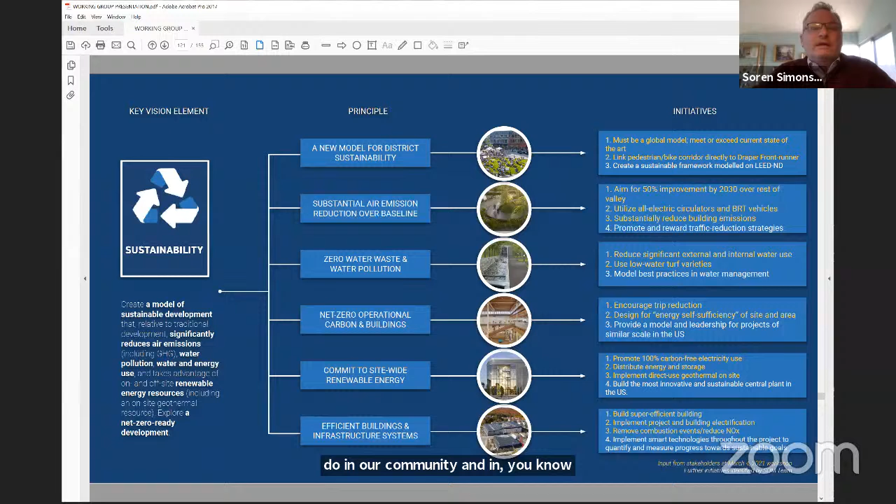And with the confirmation last week of Representative Haaland leading now the Secretary of the Interior, I think we're going to see greater emphasis in this, and we certainly have work to do in our community in breaking down some of those barriers that have been there for so long, and acknowledging the communities that are among us and the histories that are here as well.

That's a good idea. I like that idea, Soren.

And that monument that you spoke of, for those that don't know, it's along the Jordan River Parkway, on the other side of the Bangerter Highway from where we are. It's just a stone's throw, and it could play in pretty significantly to this green connection between the mountains and the river, taking elements of that and weaving it from the Galena Preserve up into this development area as well. So take a look at that next time you're in the area, it's worth a walk down there to capture some of that.

A lot of that was discovered when the Front Runner line was being constructed, and some of these archaeological sites were unearthed. There's, I think, opportunity for further exploration that's probably just barely scratched the surface at this point.

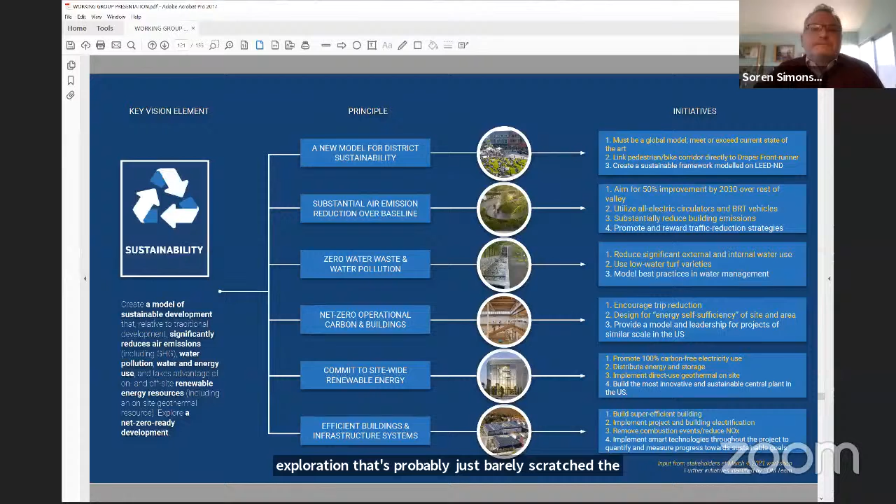Thank you, Soren, that's great. Scott, you've got a comment, and then Candace.

I'm just looking at the way these are worded, and because I listen to a lot of the noise in the environmental advocacy community, terms like aim for, encourage, and promote are often viewed as ways of giving lip service to an idea but not really being committed to it. I guess it's not clear how much control you have over these things, and it isn't clear whether there will be metrics or accountability. I just wanted to bring that to attention, because the people who are really watching this closely are more encouraged by words that connote a stronger commitment than this 'we'll try our best' kind of terminology.

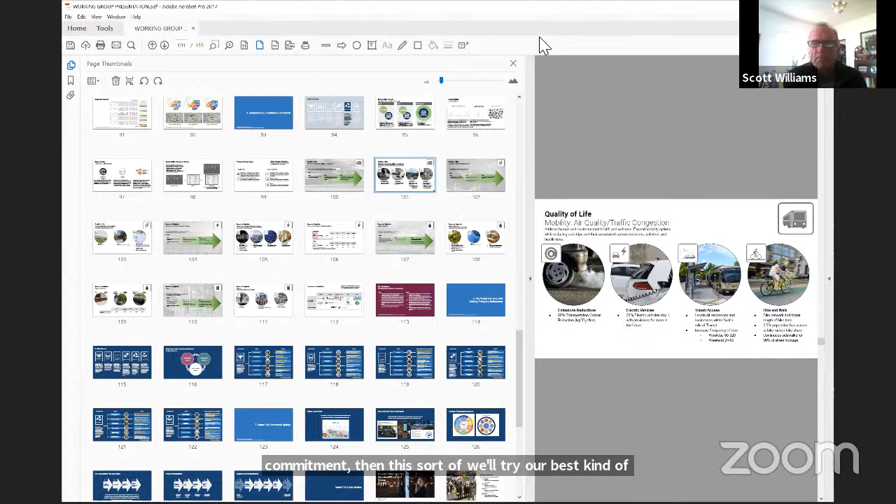Yeah, that's a good point. And I think after we hear from Candace, we'll want to go to the sustainability structure to show some of the commitments we're looking at. That's a great point, Scott.

Back to Soren's suggestion, I love it. I'm sure you guys don't need me to tell you this, but I think just working with tribal communities where applicable, to have them be participants and help lead that effort if that's something we do, would be awesome. They would definitely appreciate being included in those type of things. So thank you, Candace, yeah, that's great.

Candace, would you be able to connect us with those groups? I have a few connections that I can help connect you with. And then there's also the Division of Indian Affairs that probably have additional connections from the state level, knowing the right people. But yeah, I'd be happy to connect you with the contacts I have. Great, thank you.

Well, Arathi and Peter, you want to run through this? Yeah, Arathi, maybe you could give a ten-minute overview of where we stand on the sustainability. I'll go back to the beginning. Sure.

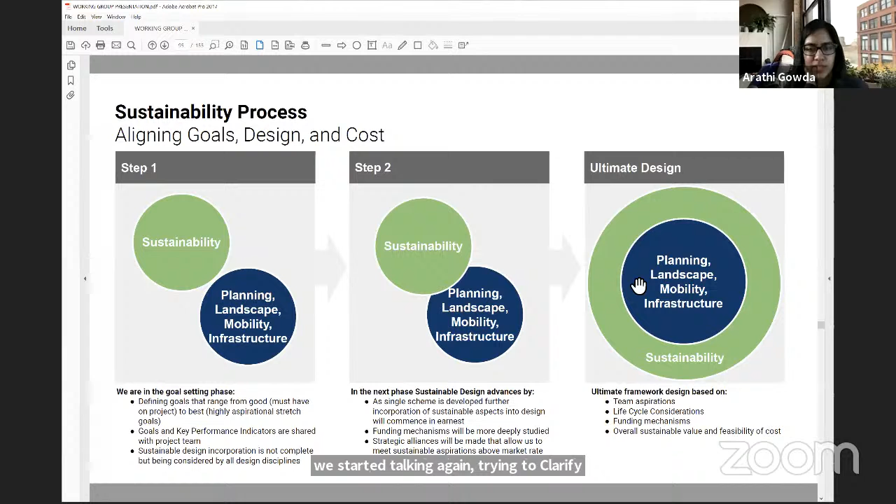As part of the framework design phase 2, we started talking again, trying to clarify some of the questions all of you are having, and we were asking ourselves how do we eventually get sustainability to be the overall umbrella. What you're seeing now is sustainability criteria, which is step 1 in a parallel track to planning, landscape, mobility, and infrastructure design. What we're moving towards is all of these ideas converging together, where the sustainability goals and aspirations are embedded in the framework design. You're starting to see that with Pete's introduction, it's making its way in, but there's still incorporation that needs to happen, and you'll see that as we talk about potential metrics. So if you go to the next slide.

To the question about aspirational design and us being able to get it built, one of the case studies we looked at was the 2030 Districts. The reason for that is the gap we see between aspirations and getting it built is beyond just the financing, it's also about a support structure throughout the life and operation of the development. So the 2030 District is a benchmark we're looking at closely, because it's a public-private partnership that allows continuing ongoing conversation to keep the project very, very sustainable.

So again, we're trying to think how do we get this embedded consistently within the project. We've also thought about third-party certifications, and I know Pete has talked to you about that.

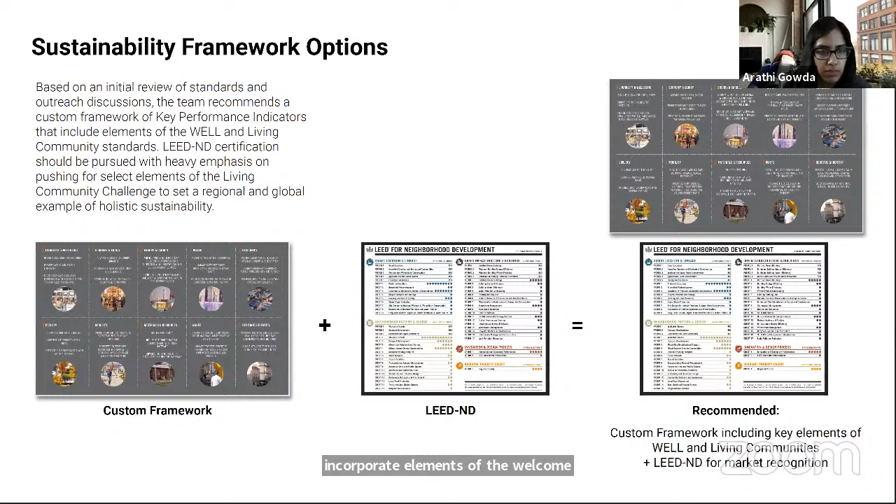As Pete mentioned, we have 5 areas we really want to focus on based on what we're seeing in the Draper Valley. Two of them are focused on quality of life, mobility, and ecology, and three of them are focused on resource utilization: energy and carbon, water, and waste.

What we tried to do, again trying to take out the ambiguity in our words - which we agree is also an issue - we want to be definitive, but we need to make some decisions before we can be definitive. So one of the ways we tried to make that clear for everyone was to develop our goals in 3 buckets: good, better, best.

When you think about it, we should always hit the good - regardless, every category we should hit the good. We should push for the better in most options. Best, we can't get on every single option because they might have cost implications, but I think we're going to run them to the ground and try to get as many of them as possible.

So loosely, that's what we're thinking about. In mobility, of course we're going to have compact and walkable districts, and we're going to prioritize comprehensive multimodal transportation. The best in this category is how do we get to adaptive transportation systems where they're net zero emissions - that's really future thinking, perhaps what we can't get today, but how do we build in for that?

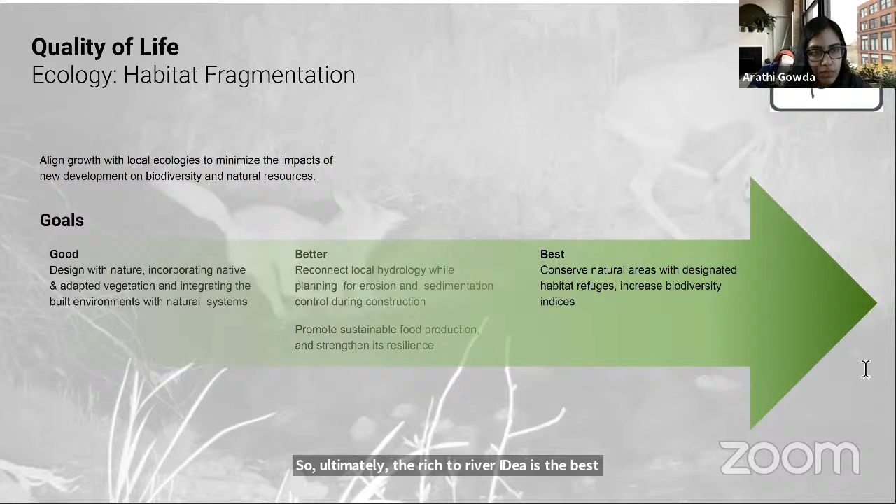So starting to think about metrics and then working very closely with our landscape team to refine these - all the schemes have 20 to 30% open space, so that's good. We want to move to have residential access very quickly, within 2 blocks. And in our best category, how much space can we preserve and maintain as a biodiversity refuge, creating bio islands and having landscape sequestration and ultimately improvement in biodiversity.

Within energy and carbon, of course good is minimizing operational carbon and accelerating the transition to renewables. Better is for us to have district heating systems, building on the history of the site where there were district heating systems. And the best is the conversation many of you have been giving us insight into: no combustion on site, 100% renewable on and off site, and also prioritizing embodied carbon and local materials.

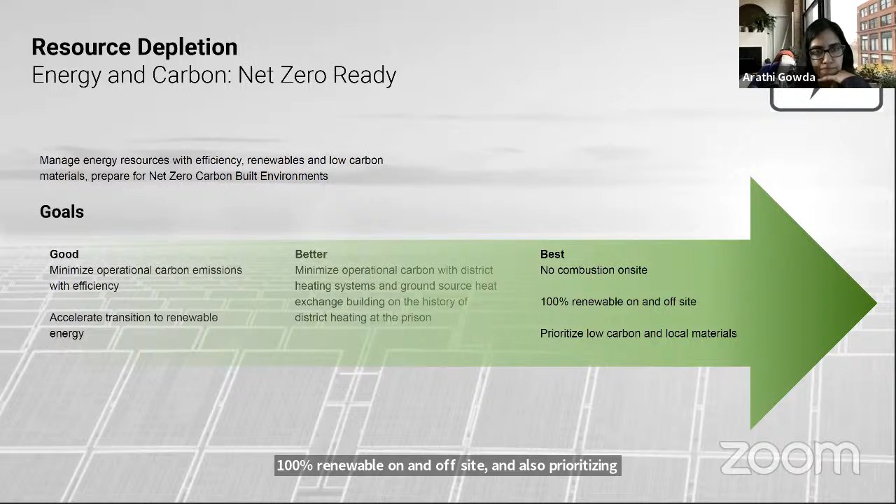So building on the history of district heating and ground source heat exchange, we're pushing on phasing for electrification—earlier is better. For efficiency, can we have a 50% cut in code? There's the start of conversations around how we incentivize that. And for renewables, can we have 20% on-site with the rest off-site? You saw from Pete's solar plotting that we've already started thinking about rooftop availability.

And perhaps you can skip this one, Pete, for this.

Moving on to water scarcity: good is reducing water consumption within buildings, potable water, and minimizing water waste. Better is zero or greatly reduced irrigation and reusing rainwater for irrigation, which is now part of what we're working on with our landscape team. Best is protecting and restoring ecosystems and habitats as they relate to water, and treating gray water indoors. We recently found out there's a gray water treatment plant very close by, so there's the start of a conversation about tapping into that versus building new infrastructure.

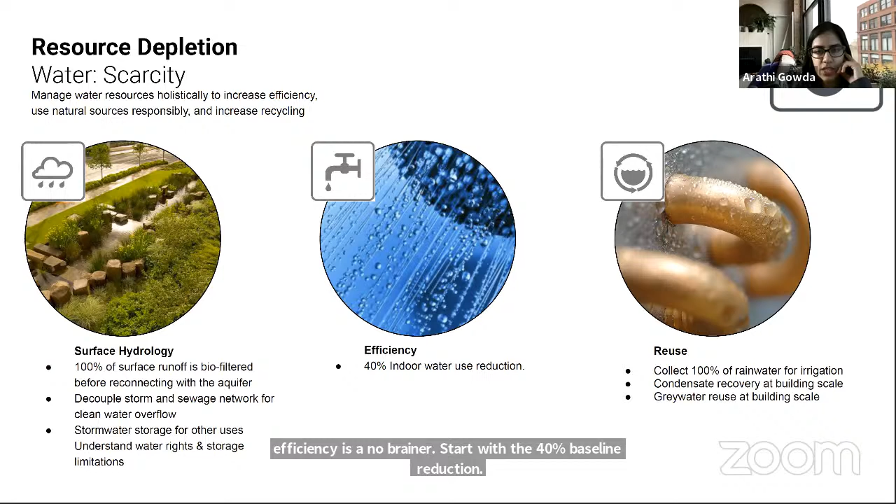Efficiency is a no-brainer—start with a 40% baseline reduction. Then there's potential for reuse: collection of rainwater, potentially condensate recovery at a building scale, and as I mentioned, gray water reuse.

I think we can skip this, but you can see we're starting to quantify this and where the savings would come from, similar to the conversation on energy and carbon. So finally, waste—we've seen in many locations that waste is really difficult. There isn't a cost benefit for it, and that was actually one of the reasons we wanted to include it. So how can we encourage it over the life of a development that unfolds over many years?

In terms of good, how do we have ubiquitous access to recycling, making it very convenient? That improves recycling rates, minimizing construction and operational waste. Better could be promoting waste to energy, composting, and waste to material products and system strategies. The best would be potentially demonstration zones that highlight waste reduction or waste to energy. There was also conversation about demonstrating pneumatic waste systems, which some of you might be familiar with.

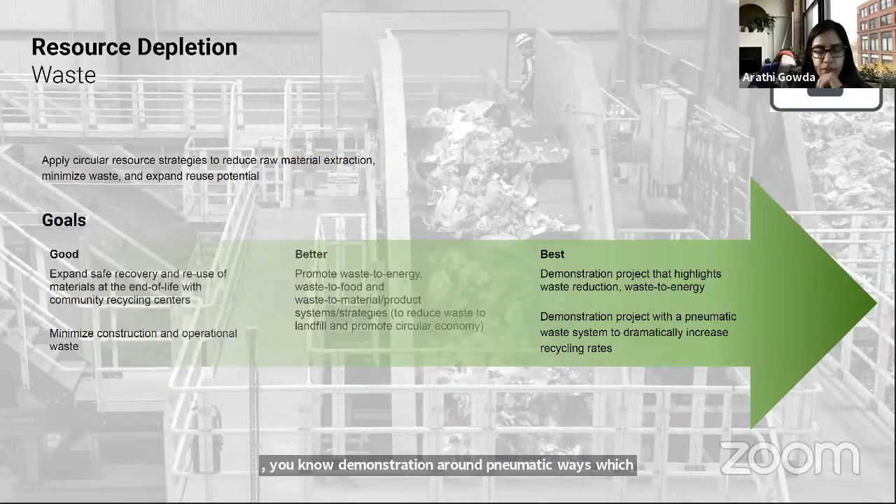Again, thinking about these in terms of KPIs: can we improve the recycling rate significantly compared to statewide, so a 50% recycling rate? Can we have smaller demonstrations—this is actually a very large example—of waste to energy? And can we also divert construction waste, targeting 75% diversion from landfill to avoid our construction creating a lot of waste?

And I think that's it. It's been great hearing everything from all of you. We've started compiling some of our outreach contacts, and every time we talk, we hear more and more, so we're adding them to our list. This is an incomplete list, and thank you today for sharing many more opportunities for us to collaborate and learn from local sustainability partners.

Yeah, for sure. Thank you, Arathi.

Yeah, thanks. So you can see that this has been a priority for us, and our team has given a lot of thought to how the concepts you've generated over our conversations might be incorporated into the project. Love to hear any thoughts you have on what was just presented.

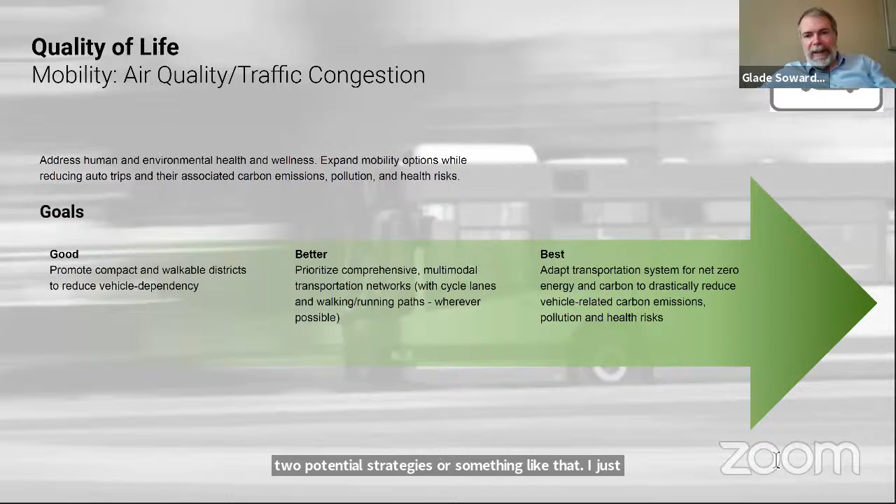On a previous slide, a little further back, there was some mention of an air quality emissions reduction goal, and I think we talked about that in one of our breakout groups a month ago or so. I wanted to offer the Division of Air Quality's help in thinking through how that might look, whether sooner or later. There's a lot to unpack about what kind of emissions we might expect on site, and also induced or external to the site. I saw a 50% reduction goal or something like that, and sometimes those get pulled out of a hat or are aspirational, but I'd like to help tie those to potential strategies. We'd be happy to sit down and workshop the inventory at some point if it's helpful.

I think it would be, Glade. And again, it is heavily linked to our ability to electrify faster, which is our principal strategy to improve air quality. So our ability to do one will help us improve the other. Anything we can do on that end will be very, very helpful.

Great. If you ever want to talk offline about some ideas, we could do that. In terms of how this information is presented on screen, I don't know if the sequence emphasizes priority at all, but bike walk is obviously the lowest carbon approach, so putting that consistently at the top of the list, I think there would be value in that.

Some of you that know the area may be aware that Sugar House, about a little over a decade ago, went through a master plan transition that emphasizes walking and biking as priority for all decision making. The implementation has gone on since then - I happen to live in Sugar House and represented the area on the city council as we were instituting some of these policies.

It certainly leaves some work to be desired on the implementation, which doesn't always realize that vision, but it is a consistent standard by which we measure all kinds of building projects and transportation investments. It was a big factor in development of the S-Line streetcar, for example. But it's an important way to organize, and I would love to see this kind of development really take that bike-ped or ped-bike first approach, and see that factor into all kinds of design decisions.